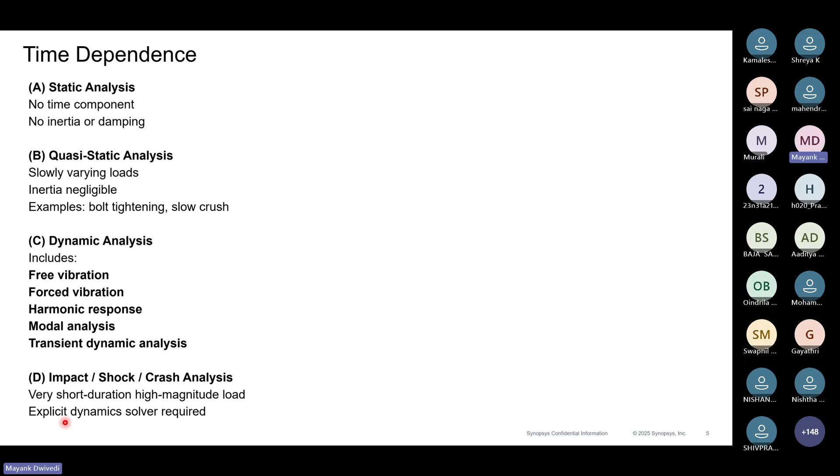This is quite detailed, understanding why those impact loads are solved from explicit analysis. I can give you certain references which you can go through as homework to get that understanding. You can connect with me after this also if you have any query in terms of the references and understanding.

Then moving on to rate of loading - we have static loads which are very slow, so the rate is very slow.

Can we solve with implicit? You have quasi-static, which is not very slow, but it is slow - we assume that the inertial effects are very negligible here. So this also can be solved in implicit.

Then you have dynamic loads, where you have moderate rate of loading, so it can be solved with implicit as well as explicit.

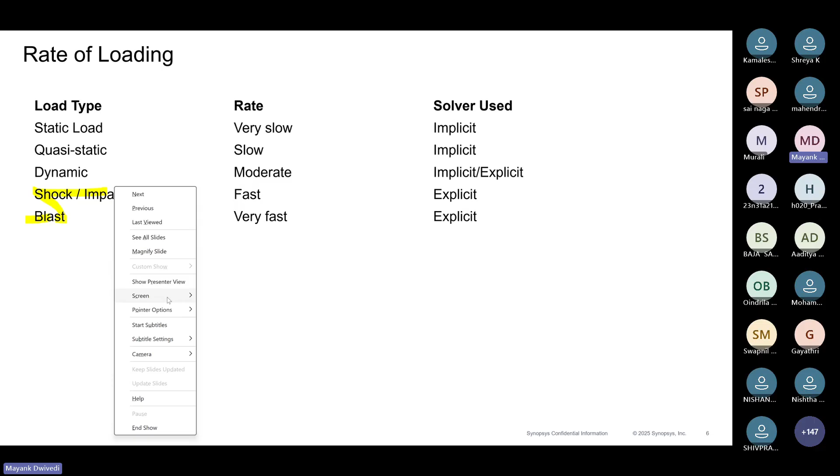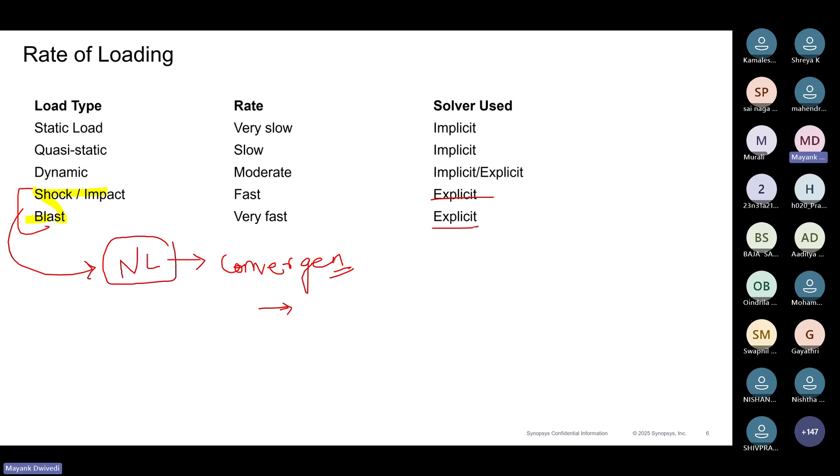Then comes shock and impact, where the rate is fast and you have to solve it with explicit, because these are highly nonlinear kind of problems. When nonlinearity is there in the system, you will face convergence challenges if you solve it with implicit. So convergence is the challenge here, and we solve those things with explicit. There are even other advantages with explicit, but those would be quite in depth, so in the interest of time I have not included those concepts here. You can note it down and go through it as homework.

Now comes classification based on structural behavior. When I say linear analysis or nonlinear analysis, you have an assumption when you derive those strength of material equations, like your deformations would be very small. Hooke's law also states that your response would be linear within elastic limits. So when you have linear analysis, the behavior of your material would be like this red line, which is kind of ideal, because once it reaches your yield modulus or yield limit, it goes into the plastic zone where slipping happens and the behavior is no longer linear.

So if your yield limit is given as, say, 350 or 450 megapascal, and in your structure you are getting a von Mises stress reaching somewhere around 600 or 500, that means your material is going into the plastic zone.

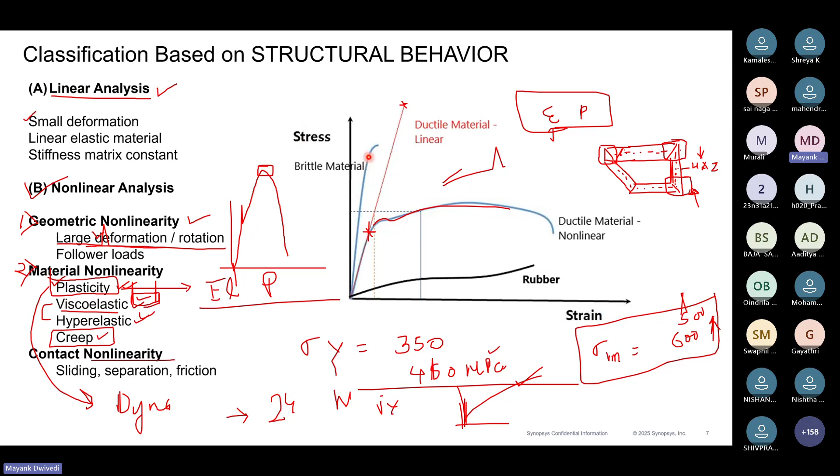So this is all about structural behavior. Other parts are not very relevant, so I've jumped into just explain the concept of dynamic loading. Let's say when we have a dynamic loaded part, my loading is basically changing. That means either my magnitude of the load can vary or the time of the load can vary.

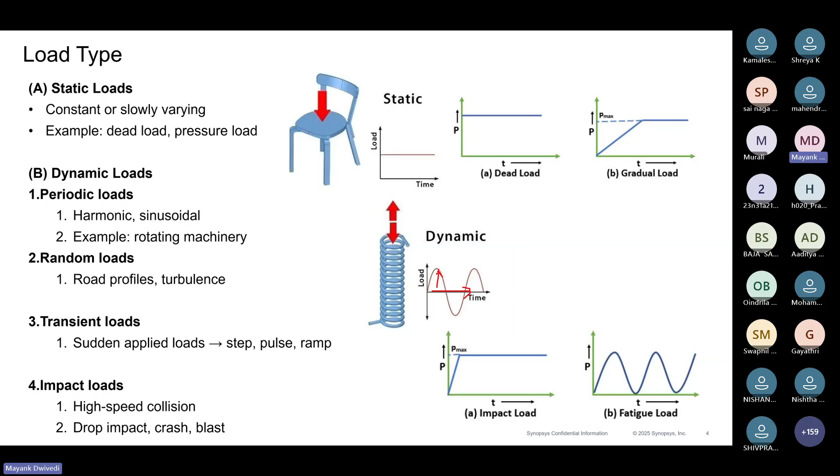Based on that, I have two concepts: one is sigma mean and sigma v, which is the variable stress, or this is your mean stress. So you have sigma max and sigma min. Sigma max is somewhere, let's say for repeated stress, it will start from zero or somewhere on top, and then you will have sigma max, and then it will come down.

Same way you will have alternate stress, where your sigma mean would be negative. It will start from negative, go into positive zone, and then come back to negative. So it's more of a compression and then tension, and that way multi kind of loading happens. Same way for fluctuating, you have sigma mean, it will start, and then sigma max. So this part would be your sigma v variable, and this is the reverse stress.

So your mean would be zero. When your mean is zero, you will have sigma max and then sigma min, and then your loading would get implemented.

Now why I'm explaining this concept is, let's say you have a sigma mean. Everywhere you see, like when you have a static load, your sigma max and sigma min would be a single value. So when I put that here, sigma mean is sigma plus sigma by 2, you will get only sigma application as a sigma mean.

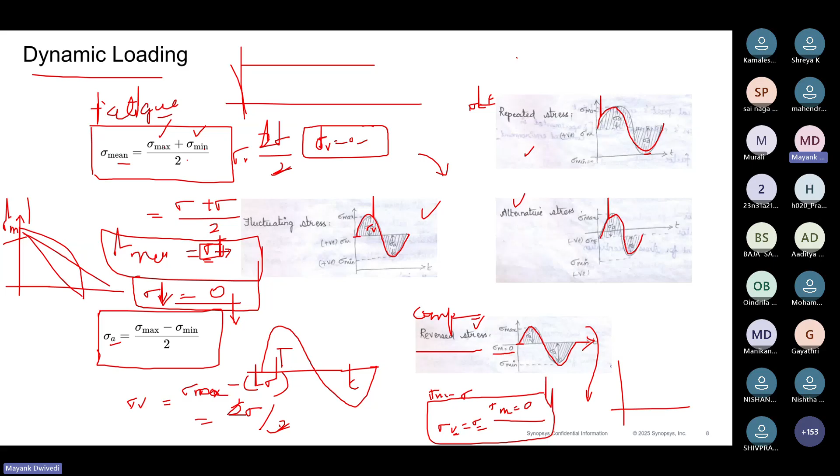So this was briefly about dynamic loading. I understand this is difficult to understand, but think about these concepts - completely reverse loading is the worst scenario, and that's why we cannot apply those sigma equals E epsilon, stress and strain relations directly here, because those equations have not been derived for these fluctuating loadings.

Let me just briefly touch upon what kind of fatigue analysis you can do. You have low cycle fatigue, which is high strain where plastic deformations are high, and these are components where you follow strain life concepts. And you have high cycle fatigue, where at low stresses itself your component usually fails.

One good example is let's say you have a rope and you want to break it. Since a rope has multiple fibers, what you do is put this rope against a sharp corner and do an up and down motion, rubbing it across the corner. You'll see some fibers start failing, and after some time the complete rope can easily be broken.

Because you are loading it cyclically - your loading is cyclic, and it may be completely reverse loading, or you may put more compression or more tension. That way, even before its yield limit, your component will fail. That's the reason you see stress life curves which we follow, the SN curve.

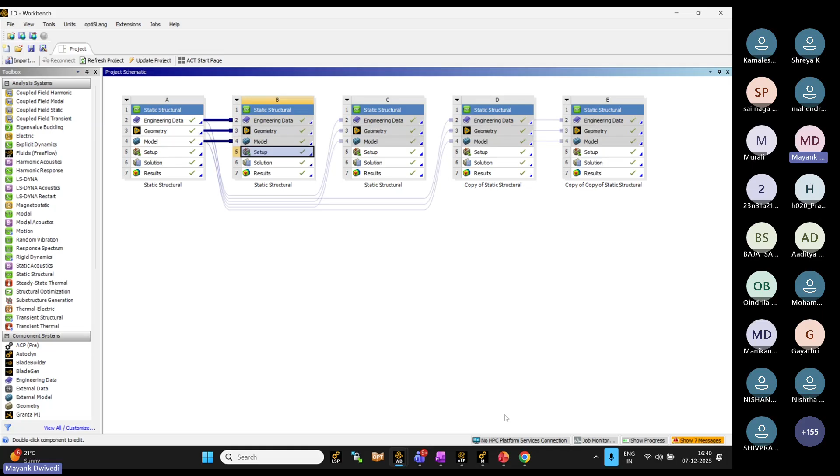There's one point I want to talk about, which most students know because of the tutorials they follow - they create a wireframe and run 1D analysis. I would say 1D is basically oversimplifying your structure. As a CAE engineer, or even as a judge, I would want you to assess the situation. Many of you might have finished your CAE analysis or completed the reports. During the evaluation or presentation phase, I would want you to explain why 1D was not appropriate in your case, or whether you have at least explored 2D, because we talked about this in a webinar.

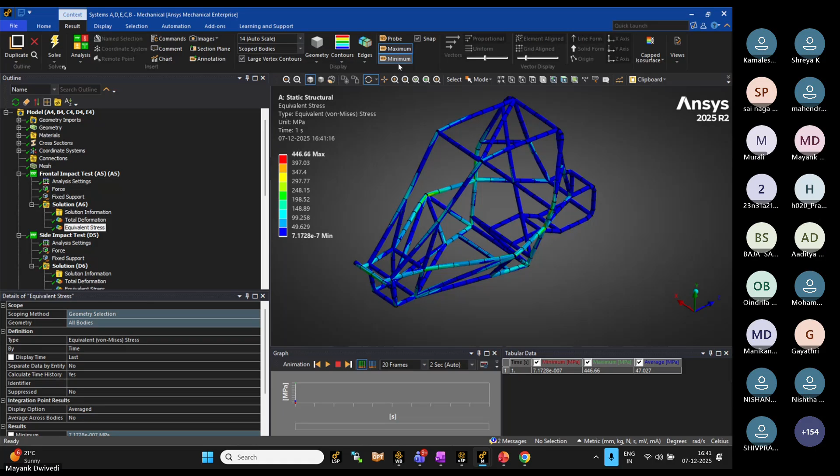Now if you see here, let's say I have a frame and some results are generated. First of all, I want to explain how you can interpret the results. You have maximum coming as 446, and it's coming somewhere here - let me check the results. You can probe the maximum.

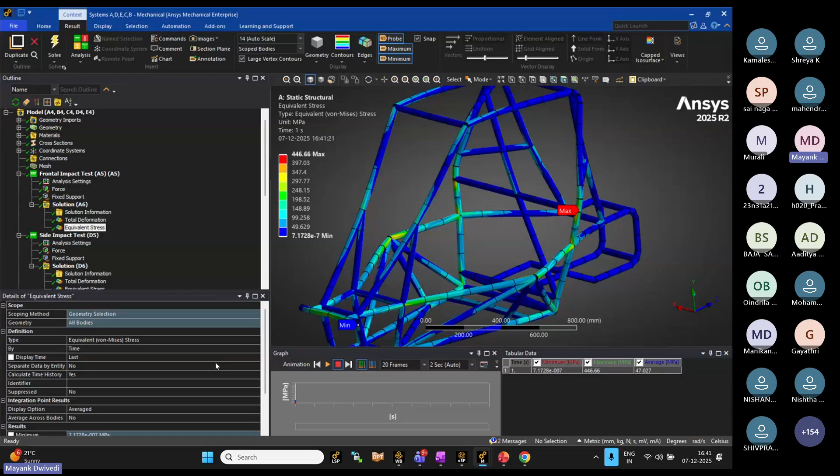So that way you can understand and decide whether these results make sense or not, or if you still have doubts. But anyway, I wouldn't prefer you to perform 1D analysis, because there's one assumption we make - that throughout loading, your cross section would not change when deriving those equations. So in 1D analysis, even with a single bar, it will only have one point where you are applying the loading, because it's one directional.

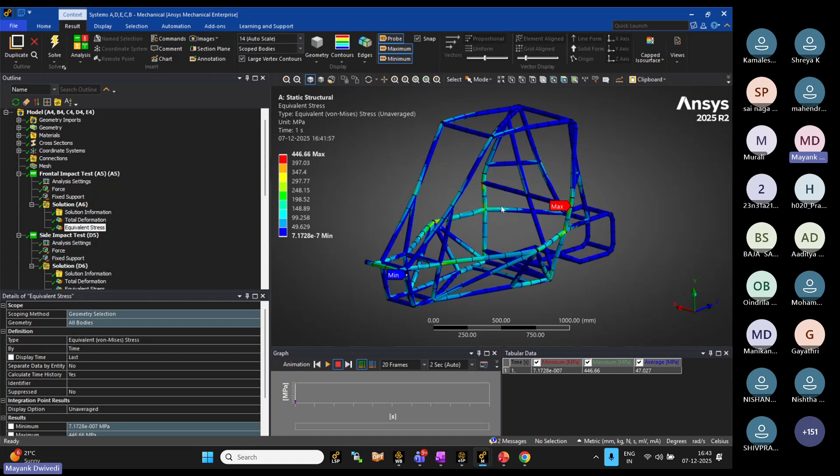Based on that, planar effects or whatever happens in other directions will not be captured properly. So when you put a beam or 1D element through bending, it will not capture that bending properly - because when you bend your frame parts, if you observe physically, your component or frame will first become oval, your shape will change, and when your shape changes, your stress plane of application is also changing. But in 1D you won't be able to predict those impacts, or capture that ovalization of the shape, Poisson's effects, right? So you will not be able to include that in your analysis - that's the reason 1D would not be accurate, or would be oversimplifying your structures.

So what I have done is also create a frame using 2D shell elements. This shell element has 3 to 5 integration points across the thickness.

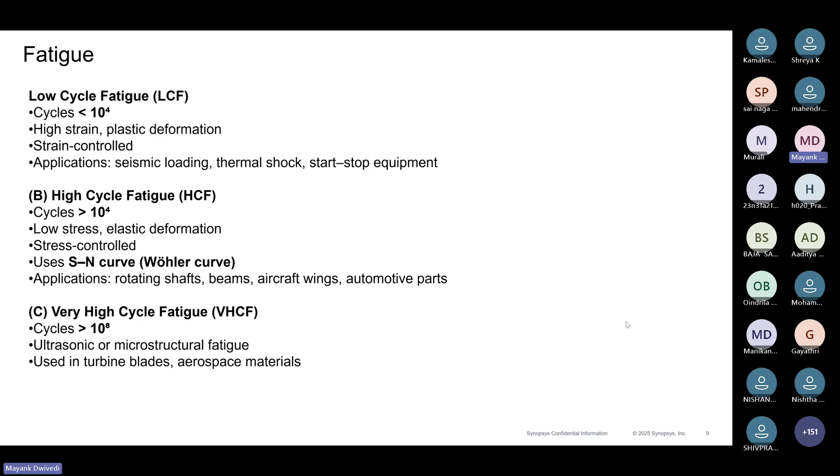When I say across the thickness - let me quickly use this to explain the concept. Let's say here you have a frame, and this is the thickness part, with your mid surface somewhere here. When your part undergoes bending, say loading is applied in this direction and the other way - your top fiber will always be in tension mode and the bottom fiber in compression mode. But with one point integration, you will not have any stress contours, because you're capturing only at the neutral axis. Whereas if you have 3 points across the thickness, you will capture the variation like this.

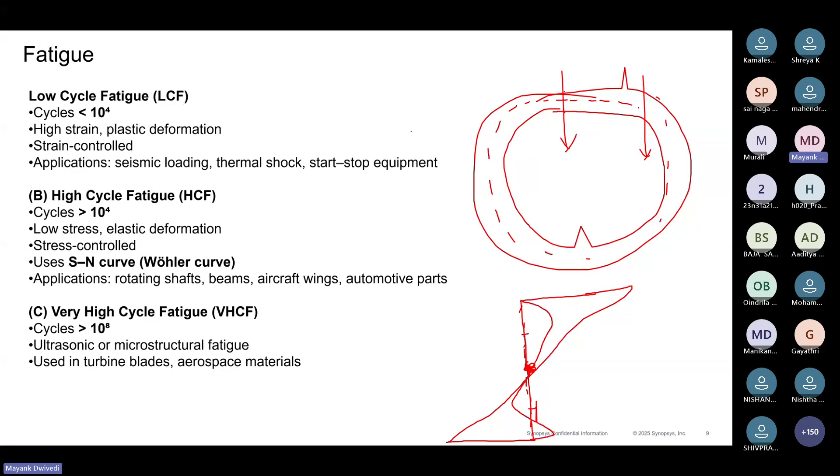So 3 points across the thickness means 1, 2, and 3. I would recommend having 5 points if you have more combined loading, so that way you can capture this kind of stress properly in your frame. That's the reason we advise using multiple integration points across the shell element thickness, and you can get this option in your dynamic analysis.

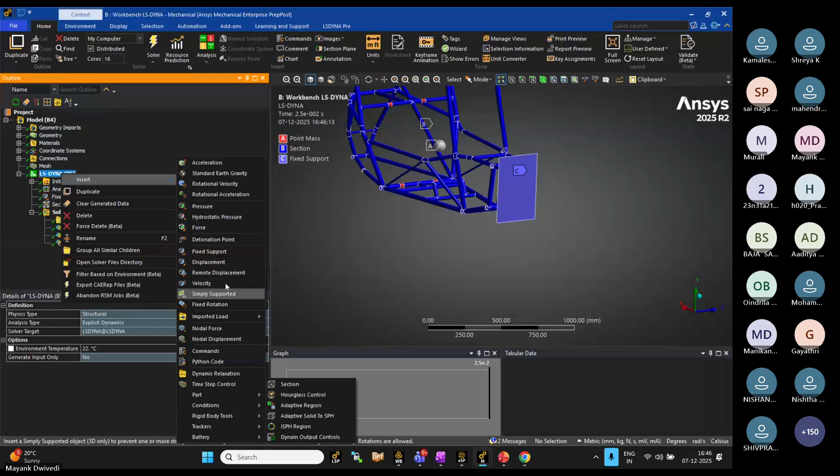If you go here, maybe not here, where is it? LS Dyna, yeah. So if you see in LS Dyna, you will have this option of including the section. When you right click on it, you will insert the section. So when you insert the section, you will be able to do it from LS Dyna pre.

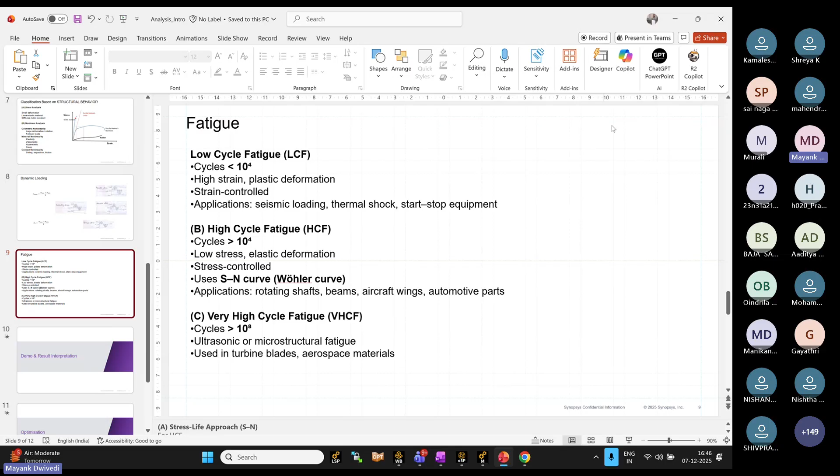Where is it? Section properties. So when you edit, you'll be able to define the integration points across thickness. When you include it, these are practices which, as a CAE engineer, you need to follow. Otherwise there is no difference between an engineer and a layman person who just follows the tool. That way you can define it. These are small things which, understanding them, will make us a little bit better day by day. So that's how you can define the integration points across the thickness so that you can capture the bending.

So I would recommend doing all kinds of analysis on the 2D model. For mesh size, the recommendation is to capture the stress wave progressing across the structure, so that way you can define it. But mesh size should remain such that you do a mesh convergence study, and wherever your stresses are stabilizing, that way you can follow.

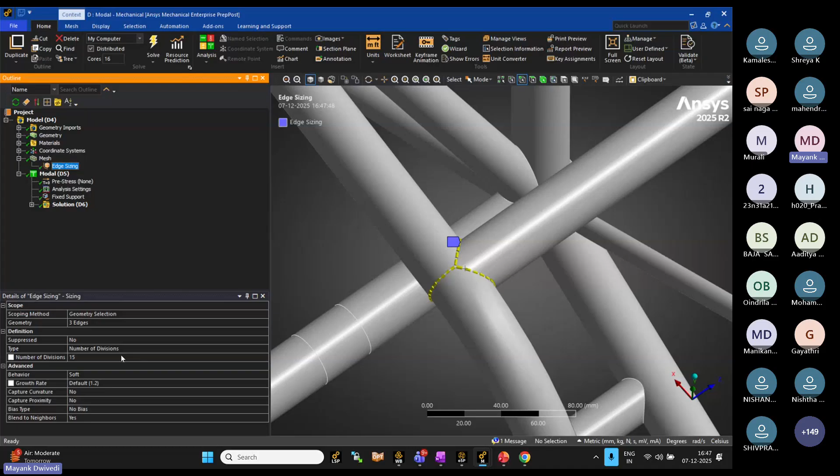Try to model, if in case you have a single frame, try to model the intersections using the way I have used edge sizing. You can define the edge sizing - you can select the edge, pick the edge, and right click on it. You can insert sizing, define the number of divisions, and with that you will get more uniform mesh across your connections also. So these kinds of small things you can follow to have more structured mesh.

And I would say to go ahead with quad mesh, because this would not be very stiff in terms of your deformation predictions. So mesh-wise, you can use quad mesh.

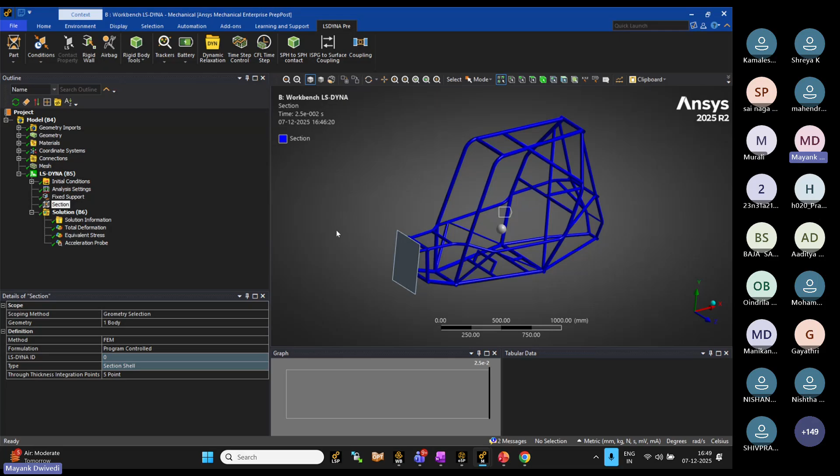You can do the mesh convergence study, and you should be able to talk about it - like if you have picked 10mm versus 4mm, maybe in your model you may not generate much difference. That means your model is already optimized in terms of mesh count. So you should be able to answer that you have done this analysis, and this is the best possible settings as per your computation resources and as per your time. That way you can explain those things.

Now comes the material part. So here I have defined bilinear isotropic hardening, with a tangent modulus of 206 megapascal. So I have yield strength and I have tangent modulus. This bilinear is basically telling - your initial part is linear, this is the elastic response, and this is your plastic response. So this is the bilinear type of plasticity.

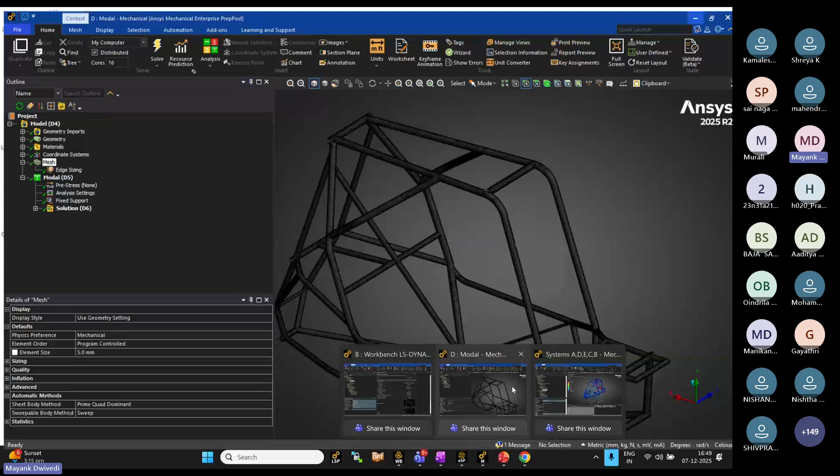So this is the material used here, and that's where I have defined the elastic plastic material - I have used three materials here. Now comes the optimization part - I have the material, and now how to select this material and how to select the thickness.

One way is you can define multiple analyses performed - like you can create one more model with a varying parameter, maybe thickness, and with another analysis define your material separately. Or you can do it in the analysis itself, in mechanical itself. Let's say this is the surface - I have put it as a P, earlier this would be like this. So what I have done is I have defined the thickness and put it as a parameter.

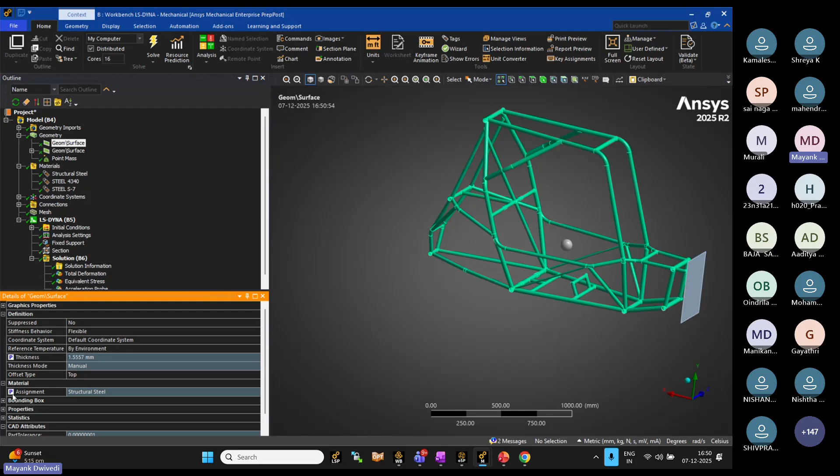And same way I have defined material as a parameter. So when you activate these two points here, you will get this kind of window in your main window. That's how you have defined your parameters. If you see these parameters, they will come this way. You will have P2 and P4 - P2 is your material assignment and P4 would be your thickness assignment. Now it will talk about what would be your output parameters.

So then again, you have to define your output parameters. Now my output can be my equivalent stresses, either maximum, minimum, or averaged. Or maybe what I can do is optimize for my deformations, or optimize for my mass. That mass may not come here, but yes, you will have another option of minimizing your mass.

So you have defined these parameters - maybe equivalent stress, you have put this as a parameter, and maximum value of this as a parameter. So what you will get is you will be able to see, okay, this is the stress maximum, which is also your output parameter now. So these would be your inputs, and with this you will have your output as a parameter - it also gets impacted.

So then what I have done now - when you click on this, you will get this window which is the table of design points. So if I close this, I will get this kind of window generated. Then you can define, okay, this is my assignment for material, and this is my assignment for thickness. So I can vary my thickness also, I can vary my material also, and these are my design points.

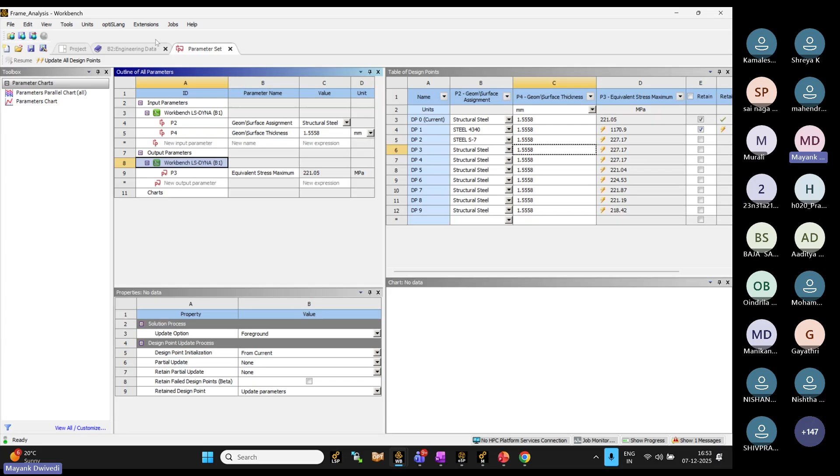So the important thing is you have to define those materials in the engineering data, and you should be defining those with actual values or the parameters which you have at your disposal. So this is one way of doing the optimization, which can be done with a parametric approach even in the mechanical itself. Another way is there is one tool called optiSLang.

So optiSLang is also lying here. You just have to drag optimization and put it here this way. When it's dragged here, you will see this kind of window, and when this window comes, you will be asked for two to three options. Let me see whether again it will ask for it.

Now it will ask for the criteria. So what would be my criteria? My criteria would be to minimize the maximum stress - this is just an example. So what I have done is I picked this as a response, and I am putting this criteria as minimized. Either I can maximize it or minimize it, and for mass also we can minimize it.

So when you define this minimization, it will ask for how many number of iterations you want to run. Just for the demonstration purpose, I have only put 5 runs, because it was taking quite a lot of time to run. So that way I have defined 5 iterations.

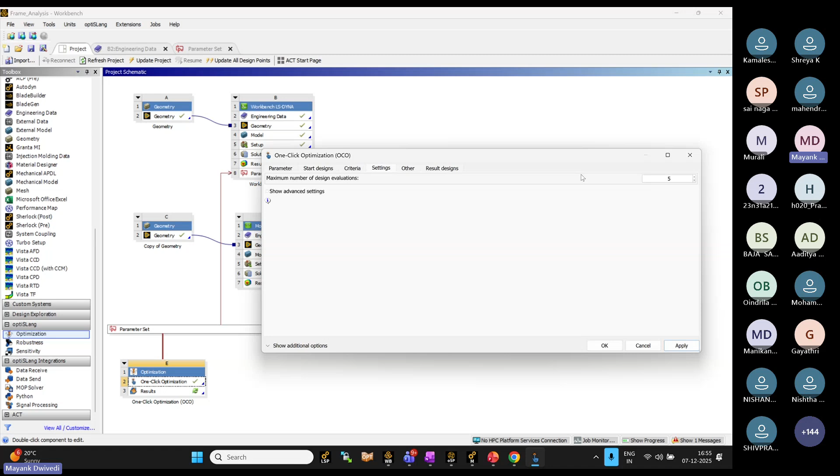And once you define all those iterations - if you see here, maximum number of design evaluations, you have put 5. So it will run 5 iterations, and based on that, it will try to minimize the mass, minimize the stresses. If you see here, with the value of thickness, it has reduced - it has kind of minimized your stresses. So in the 5 iterations, you have got 218.424 as your final minimized objective. That's how you can define the optimization, and do the optimization on your components accordingly.

And I mean, once you start following the optimization, you would be able to understand - okay, this much of mass is being saved, or that is how robust my design would be.

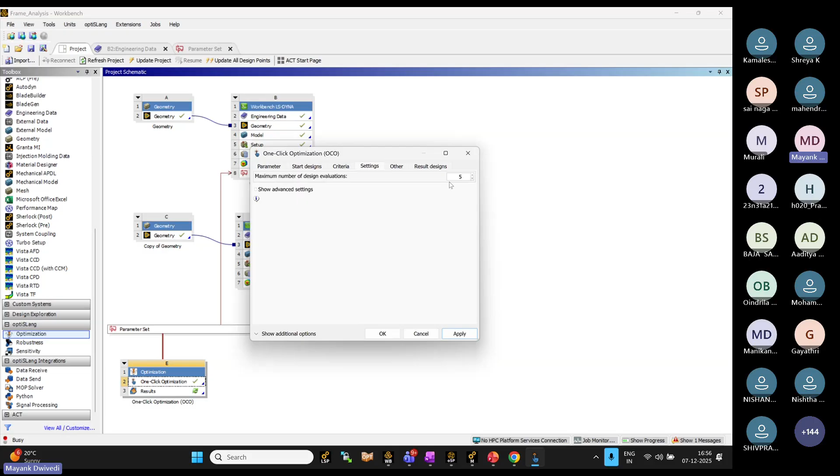So I think I have briefly touched upon optimization. There is no theory part to explain in optimization, because it's about parametric variation and based on that, what should be your response. You can do this manually by running multiple analysis instances, or you can do it in a streamlined way where all outputs get compared together, and the results make more sense.

Now, why optimization? We have two kinds of optimizations. It can be direct optimization, which we have done, where we are simply running iterations, varying the thickness or assignment, or we can have one more thing called meta model.

From a machine learning or algorithms approach, we can create certain surrogate models which would further reduce the design iterations needed. This is a more in-depth topic which may not be very useful to you as of now, but you can give it a read and maybe utilize it in your optimization purpose.

So this was all what I planned to cover today. I hope some of the value addition has been done today. If you want to understand more in depth about FEM analysis, there is a very good book called Finite to Infinite by Nitin Gokhale, where the language is very easy. You can follow it in your day-to-day life, and it would make a difference in your understanding.

If you want to understand finite element method in more depth, there are NPTEL lecture series from IITM that you can follow. And a very good book from K.J. Bathe is also there, which can be followed. I think that is all from my side today.

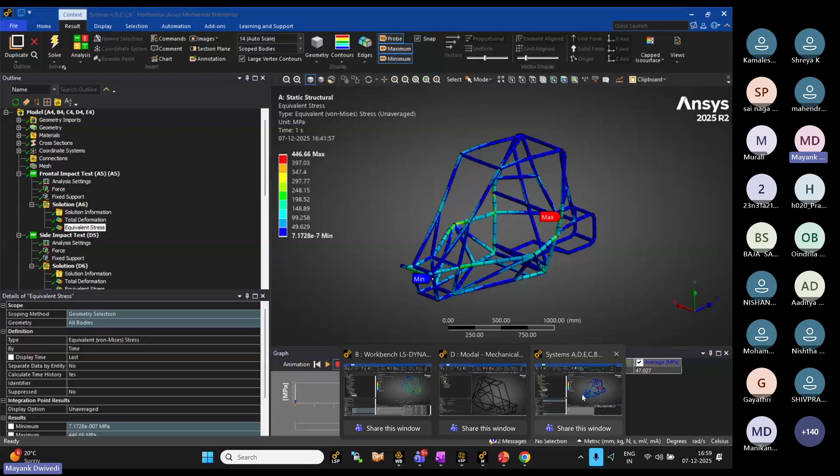Let me quickly showcase and explain this with an example, maybe in my model. So, in this itself, if you see here, this is a dynamic analysis where FOS will not make any meaning. But you see here, when this model is being buckled, the complete member is being buckled, right?

So when this member is buckled, that definitely adds to your FOS being very small. So what you can do is try to see whether some local bucklings are happening in your model. Maybe somewhere we have small interfaces.

Let's say in this model, maybe in this area, the top triangulation is quite rigid, that's why it is not deforming. But sometimes you see deformations in this area itself, and that also would lead to lesser FOS.

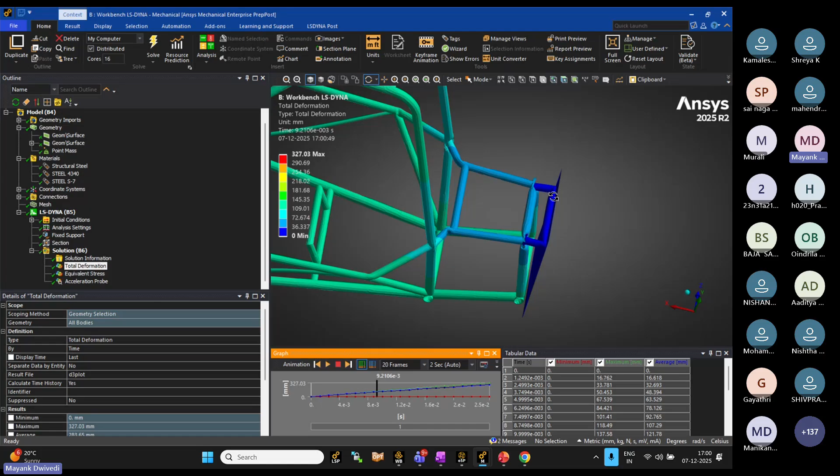So first of all, you need to understand whether the deformation is localized or not. If it is localized, you can further triangulize it and make it more distribution-worthy. Your structure should be such that it can distribute all the loads coming to other locations, or absorb it appropriately.

Can we use surface model here? Surface model is basically the 2D body. Yes, you can use surface body. Preferred mesh quality would be, your mesh should capture the flow properly, your deviation should not be there. You have multiple quality criteria in terms of mesh - those are pretty standard values which you can get from the internet, but try to see that your out-of-plane deformations or out-of-plane mesh quality should not hamper.

For mass optimization, I think I would give some references. From there you can try to understand it, because in the interest of time it is quite difficult to explain it in detail.

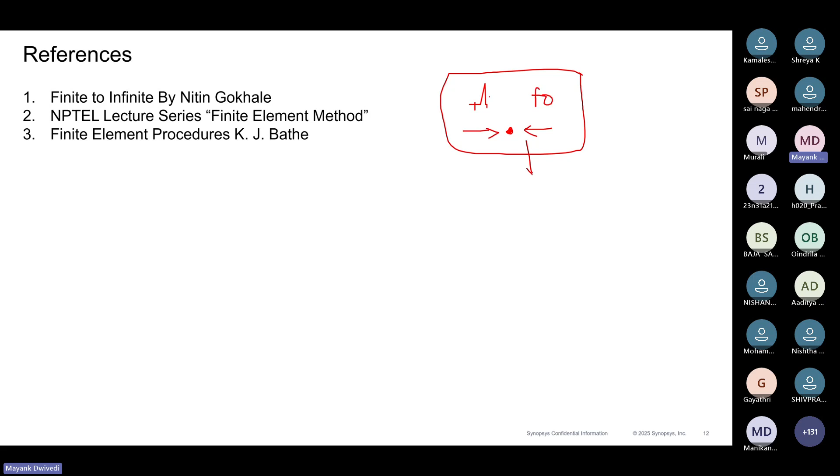So in dynamic analysis, what are the results which are important? I will quickly showcase it here. Generally, in implicit analysis, there is a simple difference between implicit and explicit analysis. Implicit analysis, for each and every time step, balances your input and output force - force input equals force output. That is called convergence. Whenever your convergence is happening, your analysis will be accurate.

Whereas in explicit analysis, what happens is it basically checks for energy, because here there is no convergence check at every moment. For each node, your forces will get converged, your moments also will get converged - it will be equated to zero. So all the forces would get balanced and all the moments would get balanced. When this balancing is there, you will not get any errors accumulated in the results.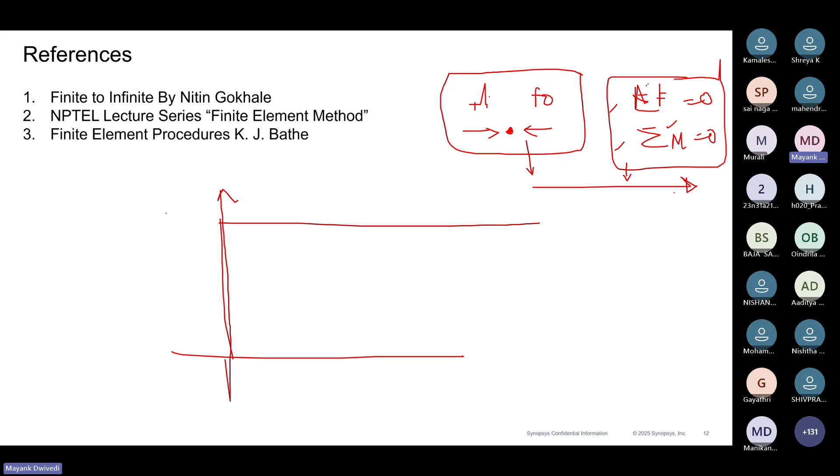But if you talk about explicit, this balancing would not be there. So what it does - you will have total energy of the system, kinetic energy. The energy given into the system should be absolutely converted into internal energy of the system. There can be a small gap because of contact parts coming into the picture. So whenever you do explicit analysis, always try to see whether your convergence of KE to IE is appropriate, or whether any contact energy is rising. First check should be the energy conversion. When the energy conversion is accurate, or the phenomena is captured properly, then you check the animation. If your phenomena is captured, you can read those deformation and stress results. I think those would make sense.

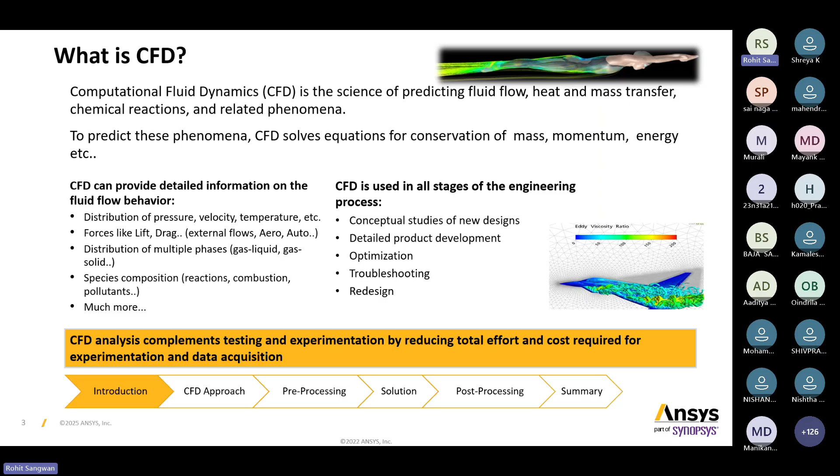So overall, CFD will save your cost and time also. So you can check in your simulation, then go for the manufacturing part. First check your design, then go for the manufacturing.

So you can see in this car - generally in Baja we don't have very high speed vehicles, but if we talk about the FSAE car, drag plays a very important role there. But here also we can reduce the drag, so we can have maximum efficiency. So overall it will save our time if we go with the virtual simulation.

These are few examples - other kinds of simulation also we can perform, like turbo machinery, compressor, IC engine combustion, two phase heat and mass transfer, then heat exchanger.

So you have a radiator in your vehicles. If you're fixing that, then how heat is transferring to make the engine cool - that also is very critical. So you can do those kinds of CFD simulation also there.

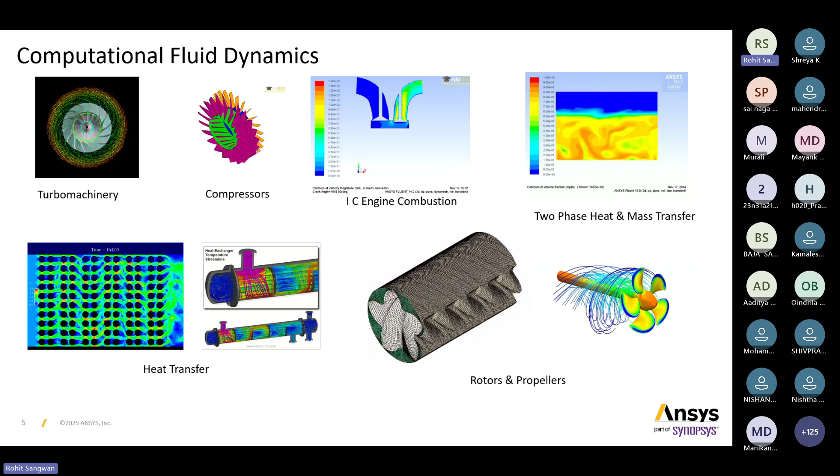If something is a rotating part and you want to do CFD simulation there, you can perform the analysis of that part. Generally, we can do tire simulation also, but at student level we are not performing that much. But if you have something rotating that you want to analyze, where the flow plays a very important role - either air, water, or any fluid medium - then we can perform the CFD simulation there.

So these are a few example applications where we can perform CFD simulation, like internal flow, whether the flow is laminar, turbulent or multi-phase. We can perform internal flow simulation, external flow simulation, battery simulation, combustion simulation also if you want to optimize your engine. For that also we can do CFD simulation using Ansys Fluent, as well as another tool, Ansys Forte, where we focus more on the combustion part.

So most industries are using simulation to optimize their engine power. Then heat transfer - so you are putting a shade on the driver, how much radiation it can bear, because when you're driving in rest conditions, okay, there is a lot of heat that will come. So what kind of metal we can apply, how much conduction and convection will come - all those parameters you can identify with the help of CFD simulation, and you can make your vehicle in a better way.

So the shade material, along with the design input requirement, how you can make heat transfer more effectively - how much sun radiation will come, how much temperature will be there at a particular location when we are putting brakes. So we do structural analysis along with it - if I'm putting some coolant, hydraulic cooling, how it will help me. We'll increase some weight, but the efficiency of the vehicle will also increase. So this kind of simulation we can perform on our vehicle.

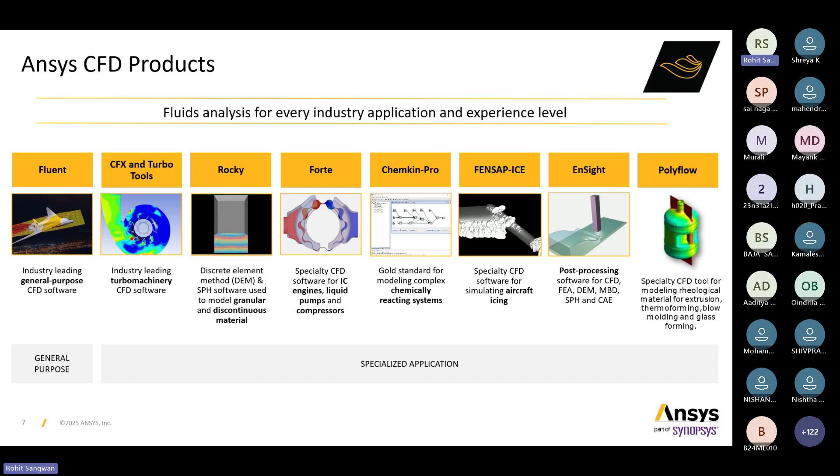Then lastly we have Polyflow. We find a lot of plastic parts in vehicles, related to plastic molds - how the mold will be created and how the formation will take place. Those kinds of simulations we can perform with Ansys Polyflow.

Now we'll go through the CFD flow chart - how we do the simulation and what the procedure is. First we have to identify our problem - what kind of simulation I have to perform. If I'm looking at external aerodynamics, I have to identify my major goal, whether to reduce drag or reduce lift. We can work on both together, or focus on them separately.

If you're looking at heat transfer, based on those parameters we have to identify our domain, and we can clean up our CAD model also. We'll identify the domain, then do the pre-processing. We can create our CAD model, or we can create it in our SpaceClaim tool. There are three tools for modeling purpose: Design Modeler, SpaceClaim, and Discovery.

Nowadays we are using Discovery because it gives faster optimization - without providing meshing and those other parameters, I can easily visualize how the flow will happen. That is generally used in the design phase.

If you have other tools like SolidWorks, you can bring that CAD model into SpaceClaim and repair that CAD model. Mostly what students prefer is to download from GrabCAD, then do the simulation on that part by changing and putting their own parameters, and see what kind of results they get.

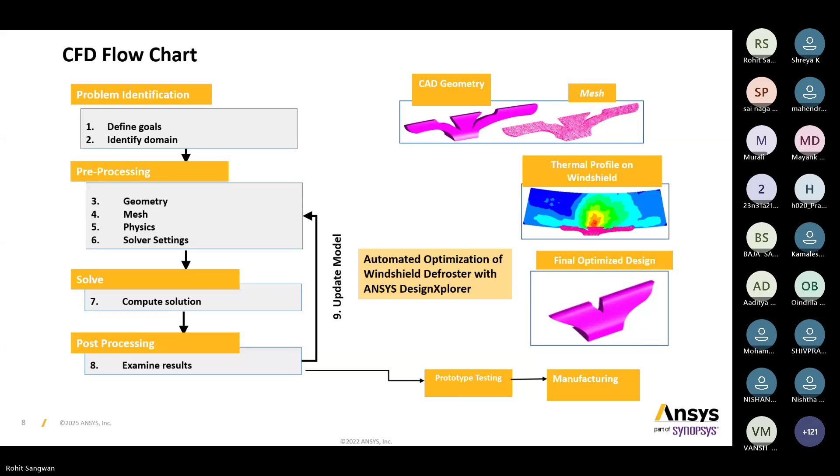If we see tool-wise, modeling we'll do in SpaceClaim, then convert our CAD model into a mathematical model, which we generally call meshing. For meshing we have 4 tools: workbench meshing, fluent meshing, TurboGrid, and ICEM CFD. Generally students prefer workbench meshing. Fluent meshing is more advanced. If you're working on a turbo machinery part, you can use TurboGrid. And if you're looking for structured mesh, where we have a lot of complex design and ample time, we can go with ICEM CFD. Mostly research scholars use ICEM CFD.

You can use both workbench meshing and fluent meshing, but fluent meshing has a major advantage - we can generate good mesh quality with less mesh count. When we have less mesh count, we have to run it for less time, so the computation time will be less.

Then we'll set up our conditions in the solver based on the problem statement, and then check the results. We have the option to check results in the tool itself, as well as other post-processing tools inside CFD Post, and then we can optimize our design also. So we can do the post-processing part also.

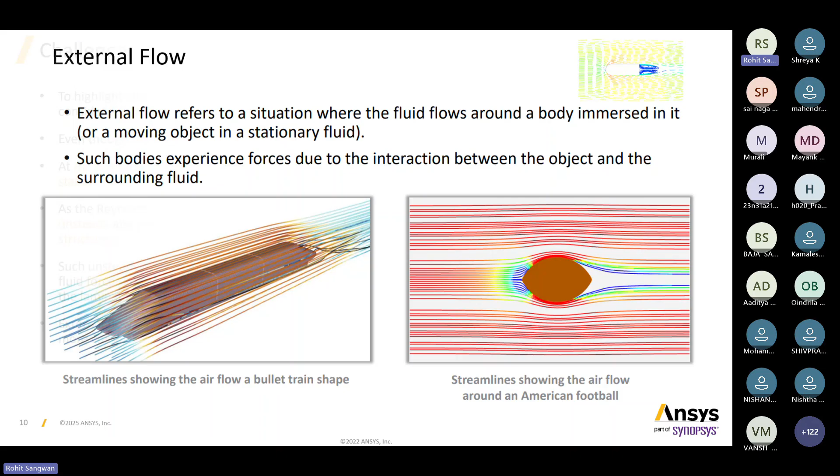So they might look very simple. For external flow simulation, you can take one example: we have a simple ball, a circular ball.

Now we'll go with our modeling part. So you can have a model of your design. Generally, when we have a car model, we create an enclosure outside the domain, so that the complete body could be immersed inside the fluid domain.

Also, when we're creating the enclosure, the tire will have sudden contact with the bottom surface, the ground level. So there might be chances that if we have sharp edges, they will be contacting with the ground surface, and the mesh quality can be reduced.

So generally, what approach should you use whenever doing simulation? Always try to give some fillet near the tires. That will help us reduce poor quality, get better mesh quality, and skewness will also be near zero.

We have also observed that a lot of students simply create the enclosure and run the simulation. That will give some values like lift, drag, and coefficient, but it will not be that accurate. So if you want to optimize and see how the flow is actually separating, where the boundary layer is forming, for such a scenario we have to create a body of influence.

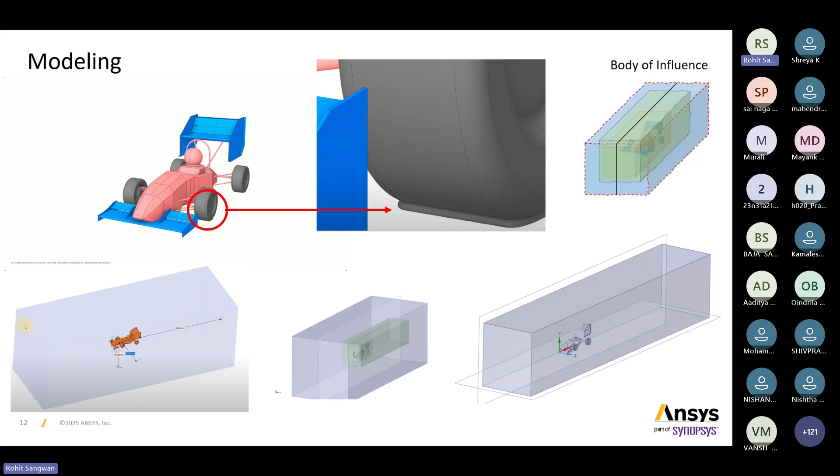Since we know our domain is very big, to reduce computational time we made it half, made it symmetric, because the geometry is symmetric. Whenever your geometry is symmetric, we can reduce computational time by cutting it from the center plane and using the center part. So we have finally used this design as our part.

Since the vehicle is moving, the wheels will rotate. To give the rotation coordinates, we have to find them in the tool itself. From SpaceClaim itself, we can find out the center of axis location. We can create the center of axis in the vehicle tires, and measure it from where it was when we imported the models, because the origin point could be different for the tire and for the complete design. So we find the center location to give the rotational velocity in the setup later on.

Then we have to provide the naming. For our case, this is my inlet, the right-hand side is my outlet, this is my tunnel walls, and the downside is my ground plane. In our case the ground plane is moving and the wheels are moving. We have given names to all parts, because naming is very important—based on the naming only can we provide boundary conditions.

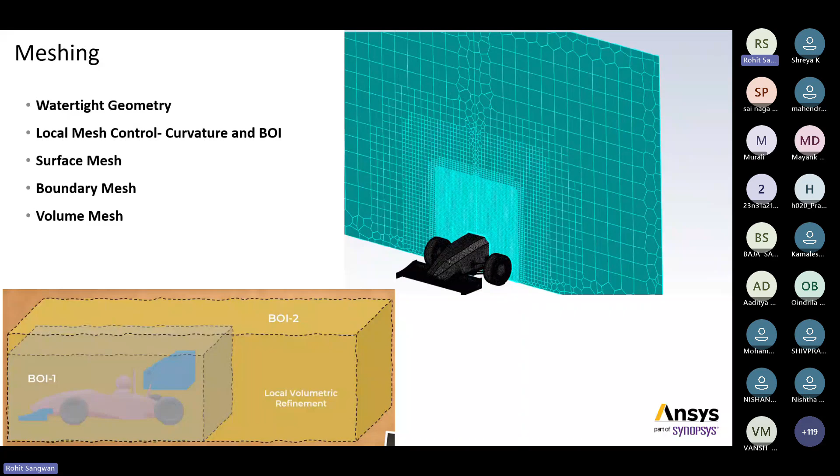Once we complete our modeling part, we'll go for the meshing. If we go with the workbench meshing, we can go with 2D and 3D. Till version 25 there was only a 3D modeling meshing option, but in 25 R2 we can go for 2D meshing also in Fluent meshing itself. That's why most students were preferring workbench meshing, but now in Fluent meshing, if you have a 2D model you want to optimize, you can do that too. So we have two options.

As you can see, we have a clean CAD model now. But suppose you have some dirty CAD model, in that case we can use the Fluent fault-tolerant meshing, so we don't have to repair that much without wasting time. We can go with the meshing and use the fault-tolerant meshing.

But for this case, we are using watertight meshing and we are providing some local mesh control, at the body of influence 1 and body of influence 2. Also, since we have a lot of curvature surfaces in our domain, we are creating curvature control also in the meshing. I will show you in the tool how these inputs are given.

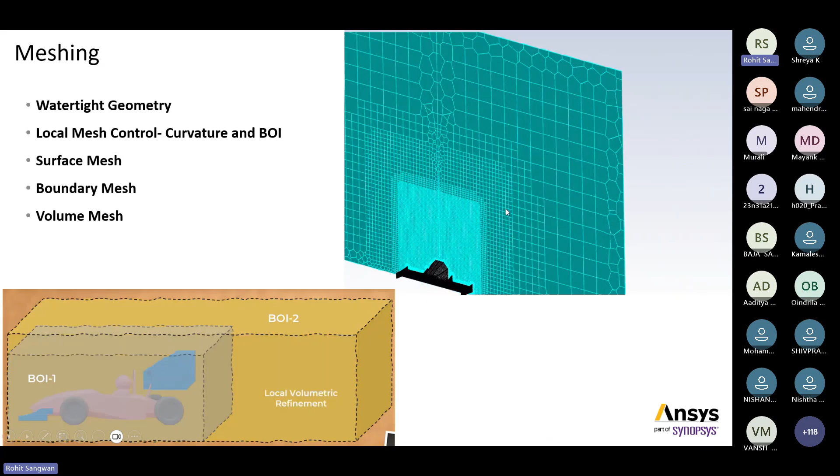Then we'll generate the surface mesh, and then the boundary mesh. You can see near this region the mesh is very fine and gradually increasing, so it's not that suddenly it goes from very fine to big size. This is something you have to keep in mind when doing meshing. Wherever we have objects, that region should have fine mesh, and in the enclosure you can do some coarse mesh also. Then finally we'll generate the volume mesh.

So this is the meshing settings we have taken. We can import the model. If you have the model in mm size, you should select mm units. If you created your model in meters, you should select meter as the unit when importing the model.

Then we'll apply local sizing. Generally students prefer not to apply local sizing, that's what we have observed. They will just click on mesh, go with the naming, and directly go to the setup. So always go with local sizing - that's why to do very fine meshing locally, we created two boundaries. You can see near this region I have created very fine mesh compared to the outside region. Then we'll describe our geometry.

There is a standard flow chart in Fluent meshing that you have to follow step by step. Once we apply the local sizing method, we'll describe our geometry, update our regions to see what kind of regions we have, and then we will add the boundary layer.

So boundary layer is the inflation layer - whatever inflation layer we create in workbench meshing, here it's called boundary layer. The boundary layer is very important to capture our flow near the walls. The y plus value is very important that we can optimize, and based on the velocity parameter values, you can find out the y plus value also.

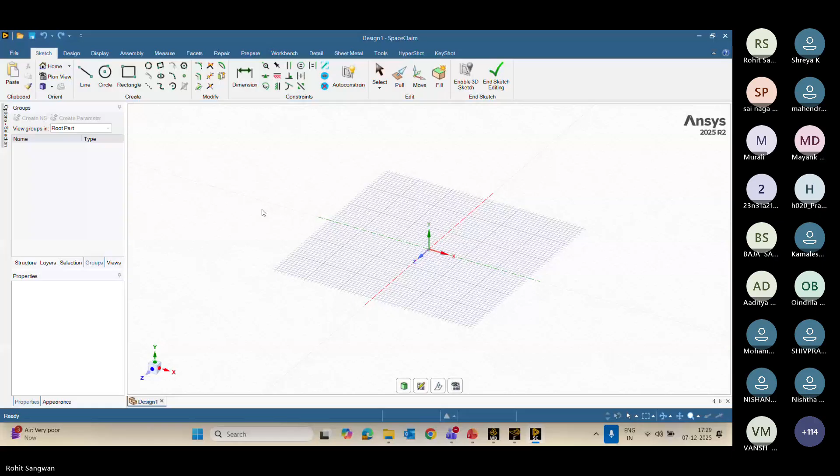So I'll show you the structure. This is like a half model, reduced. So we have the parts which are not activated. Generally whenever we are doing external flow simulation, we deactivate the models, so I have suppressed them for the physics.

Either you can uncheck them or deactivate them, because when we create the enclosure, it will imprint the faces of our CAD model onto the enclosure. So the solver will assume there is an object here, a vehicle, and it will calculate on those walls. That's why we have closed and unchecked this part.

So there we have front wing, wheels, chassis, rear wing, and now we have the enclosure - that is our fluid domain, and we have given names in the groups. So naming is very important.

Whenever we are doing Fluent meshing, the naming should be done in SpaceClaim itself. Later you will not have the option to do it in Fluent meshing. If you're doing workbench meshing, then you can do the naming in workbench meshing itself.

So this is the inlet we have, then we have the outlet on the opposite side. These are my tunnel walls, then we have symmetry on this side, meaning the same thing is there on that side. Generally that will reduce the computational time.

But if you want to use it for post processing, we can visualize the complete vehicle also, so I'll show you that. Then we have the ground that will be moving. So this is the body of influence, far field, wheel radius, all those things - we've given names so we can find out the forces on all these parts.

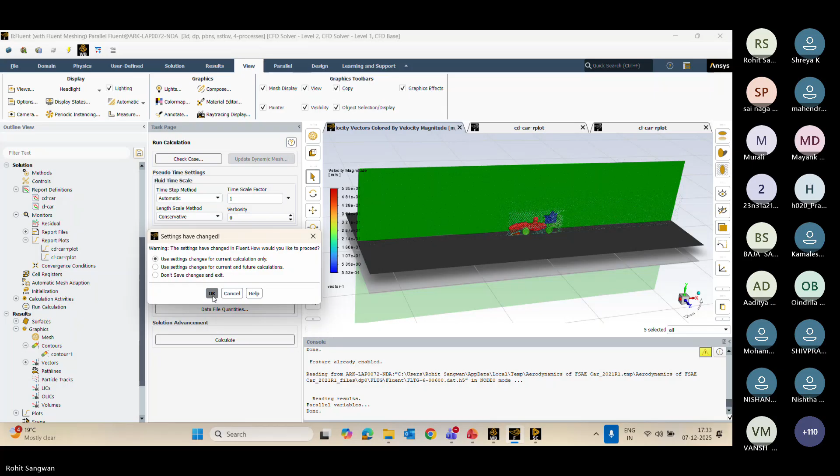Edit. So we can edit the Fluent meshing also. If we have done some meshing part, we can edit that part also.

So it will take some time, we just have to wait. So this is our domain.

There is an option just like we create the section plane - here also we have the option to insert clipping planes, and you can select the location in which you want to visualize the part.

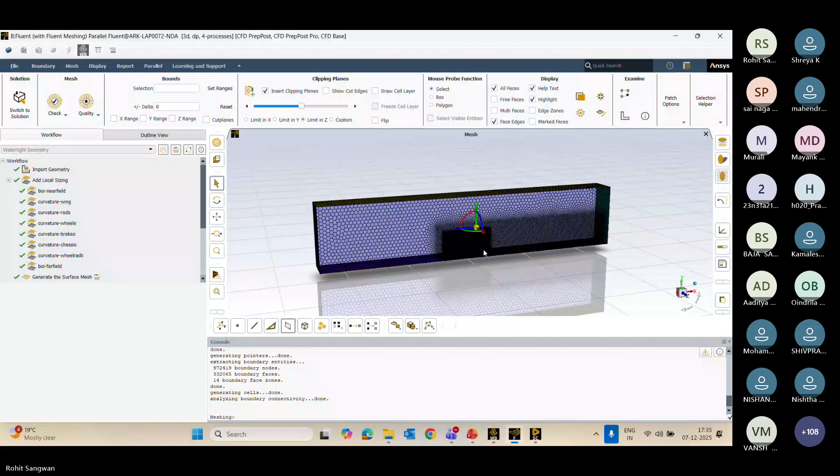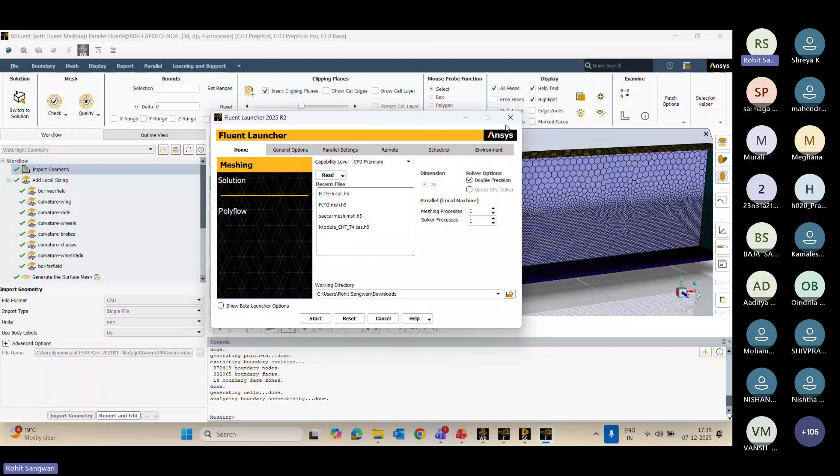So we have the option to first import the model geometry. If you want to work in the standalone system, there's also Fluent, where you can directly select whether you want to work from the case and setup with the solution, or work on the meshing part. You can select the directory where you have the file, or you can go with the workbench. So we have two options.

Generally, when we import geometry, we can select the file here. Since we are coming from the workbench, it will select automatically. Then we have the option for local sizing, whether you want to add it, no or yes. If you select yes, we have the option to apply a body of influence, select its type, and give it a name, as we already have for the part. So like this, we have to create it.

In this case, when we have external flow simulation with an enclosure, we have both domains, fluid as well as structure. But in SpaceClaim we have suppressed the solid domain since we don't require it here. So for this case, we are taking only the fluid region. But when doing battery simulation or other cases where both solid and liquid parts exist, we'll use the option for fluid region and solid region. There might also be cases of internal flow simulation where the fluid region is not there, like a hollow pipe, and I want to extrude the fluid region - for such a scenario we use the solid region. As of now, we are using the second option.

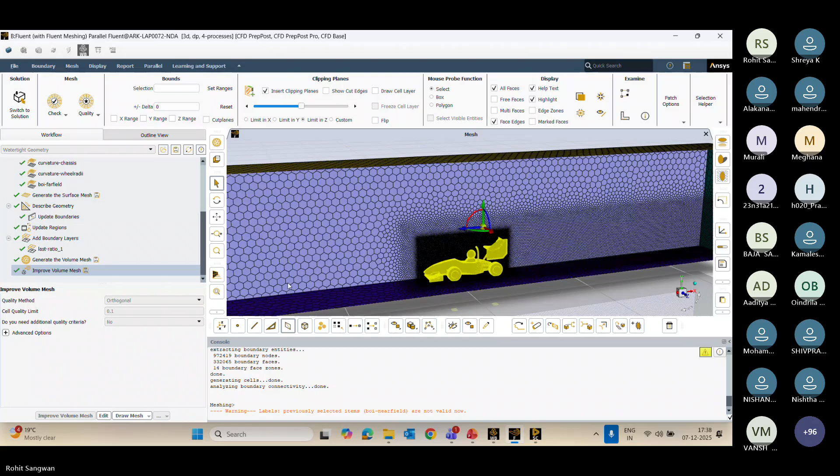Which parts we can delete as they will not affect airflow. So if you want to delete some parts, you can delete them. But in this case, what we have considered is the full whole aspect, outside the enclosure where the major force is. On the backside, you can also delete some engine parts if they are not open, but if they are open and air is directly coming through, there will be cases where the pressure will change, and there can be some recirculation regions also. So it depends on how you want to do the CFD simulation.

Just a second, it is taking time. I will just open the previous one. So directly you can switch to solution and you will come to this tab.

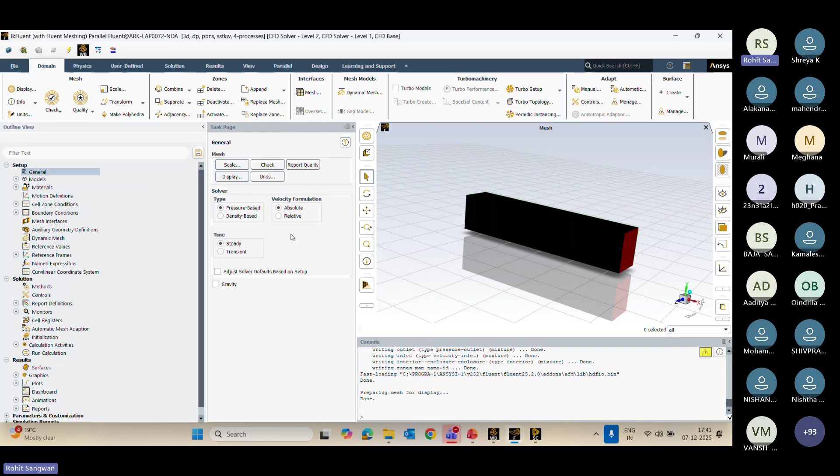Since our flow is not highly dependent on density variation, we are using pressure based solvers. Also, flow is below Mach number 0.3, so we use pressure based solvers.

We have two options: we can find results of fluid properties with respect to time, or just the final results. Generally for an initial case we go with steady state, but when we want to capture a particular time, that is a transient condition, we use transient. When studying flow with respect to time, we go with transient. As of now, we'll go with steady state.

Then in models, our viscous model is very important. Based on our velocity, we have taken input assuming 20 kilometers per hour. With respect to our inlet diameter and fluid properties like air viscosity, I will find out the Reynolds number.

Based on Reynolds number, I check whether the velocity lies in laminar or turbulent flow. For our case, the flow is turbulent. In turbulence, we have different models like K-epsilon, K-omega. When we want to capture flow separation, K-omega is recommended.

And to capture parameters near the curvature, we are enabling the curvature correction parameter also. Then these are the other parameters which control the constants in our equation.

If you want to know more, you can go to the help and read the complete theory of which model is useful for which kind of analysis. Large eddy simulation is generally used by researchers who have ample time to capture how each eddy is forming. As of now, we will not change this.

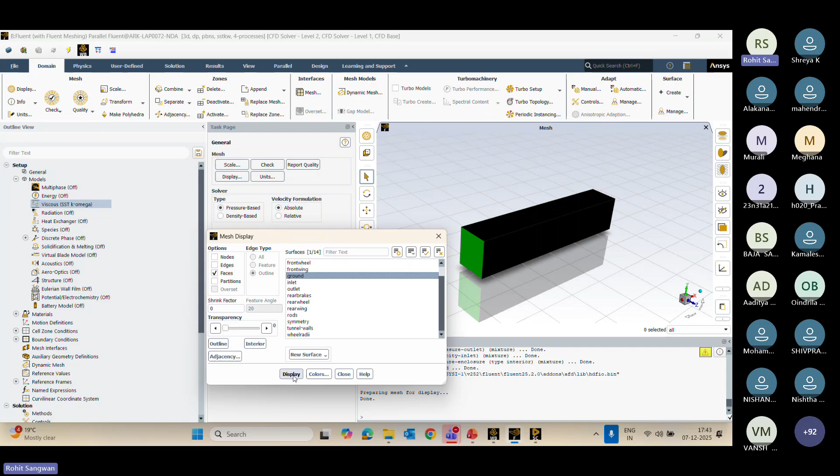Sometimes we have the mesh file. So what we can do is simply go to display and check the mesh also. Let me show you here. Whatever you want to display, it will display, so you can check the mesh file and see what inputs we have brought in.

If I check here, we also have an option: instead of this name, I can go with surface type only. So I want to select only all walls and select display. I have hidden the symmetry, and I'm hiding the tunnel wall.

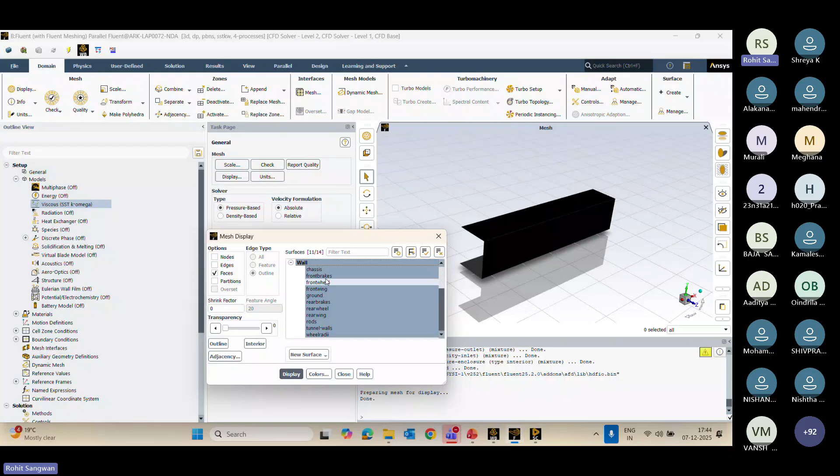Now inlet and outlet, so we'll get better clarity of the view of how the flow is, because when doing external flow simulation it is very important to know the direction of flow. Based on that only, we'll provide our lift and drag.

So this way you can check your imported model. Now you can see what I have - only a half model. But if you want to visualize the second part also, just go to symmetry and display, it will display like this. But if you want to see it in reality, you have to go to views, and there you can select the mirror plane and apply.

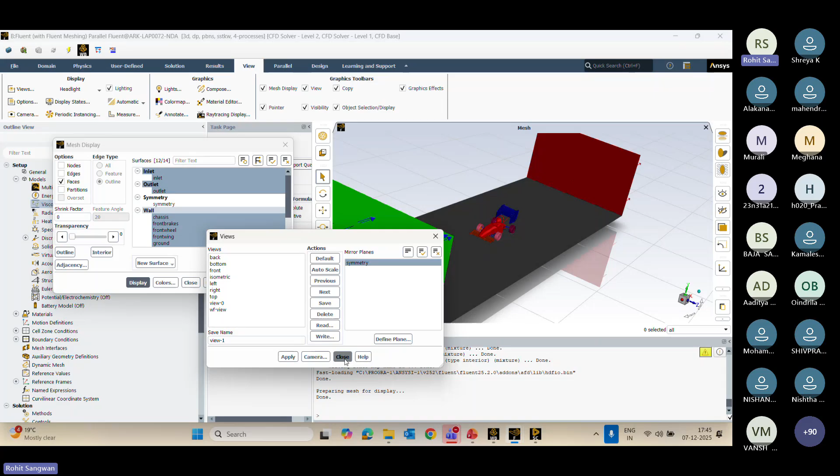So I will hide this symmetry plane. Now apply. Now you can see I have created a half model, but I can visualize my complete CAD model using view symmetry, under the view option, view mirror plane - it will create the model, but it will not add any computational time. That we generally do after running the simulation, to check the post-processing part.

Then we can go with the materials. We have air by default in the fluid materials. If you want to add some material, we have the option - just like engineering data in structures, in CFD we have the fluent database. So we can add any material here, and with each version the materials are increasing.

And if some material is not there, you can simply type the name or chemical formula here. If you know it, enter it, if not, you can leave the space and give the properties. Since we are looking only for flow, if I enable the energy equation, the energy parameter will turn on - let me show you the equation.

Then specific heat and thermal conductivity - depending on what kind of models you are solving, you first have to enable those models, then the properties will come automatically. As of now we don't require this, so we can turn off this equation, and these properties will change automatically. If you want different density, like compressible flow using ideal gas condition, you can use that too, but for this we don't require it, so it's our normal part.

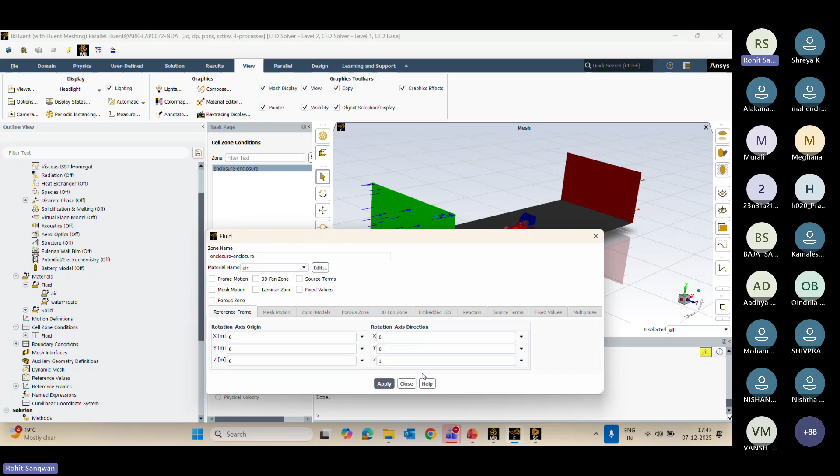Then we'll go with our boundary conditions, same way.

So here we'll go with the zone type. At the inlet we are giving the velocity. Since the vehicle is not moving, instead of moving the vehicle we are moving the air, so we are given the velocity 20 meters per second. The turbulent intensity here is around 0.5%, and we are keeping viscosity ratio 2. Same way, if we enable thermal or other models, those models will be enabled, then we can provide those parameters.

Suppose this is my normal air - if I'm giving some coolant air or hot air, if we're looking with respect to temperature, then I can provide thermal input. For that I have to again enable the models. So these things are very important when we are using those parts.

Same way at the outlet we are keeping the atmospheric condition. You can check in the operating condition, 101325 Pascal, which is equal to 1 atm atmospheric condition. You can change that parameter. We are keeping gauge pressure as 0 because gauge pressure measures above atmospheric pressure.

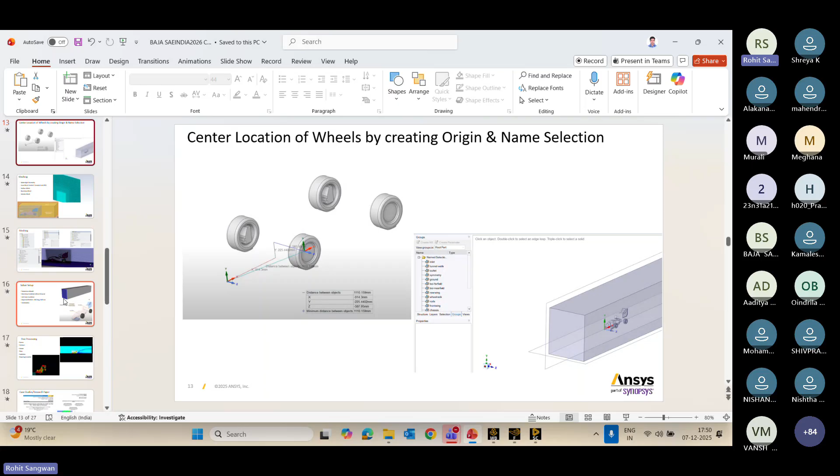So angular velocity - we generally find it by dividing the initial inlet speed we have given by the wheel radius. That way we can find out the angular velocity in radians per second.

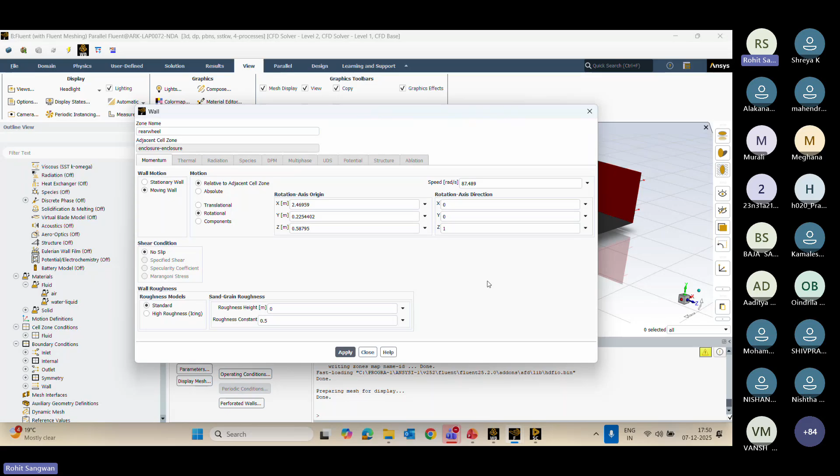Okay, then we have applied those boundary conditions. Then we'll go with the methods - for discretization we are going with second order, which is like a kind of Taylor series form. The higher order we go, the more accuracy we'll get. There are a lot of schemes also available.

For pressure velocity coupling, Simple means the pressure equation will be solved separately and the velocity scheme will be solved separately; when coupling, both will be solved together. For this kind of simulation we use the coupled scheme and second order scheme. Then controls - these are the relaxation factors to control our simulation, and we're keeping them by default.

Then comes a major important part in the external flow simulation - we have to find out the lift and drag forces. You have to go to report definition, right click, new, force report, drag and lift. Like this you have to create it.

Then you can name them and you can select where you want to know the forces. So as of now, I want to know the drag forces at this location and the direction. So you can see here, my air is coming from this direction.

So the drag will be in positive x direction, so I have kept 1. If my air is coming from this direction, then drag will be towards that air direction, so I will put -1. Same way for the lift, lift will be in positive y direction. So by default they will come like this. But if you have a different axis of rotation, you have to find out at which direction the forces will act.

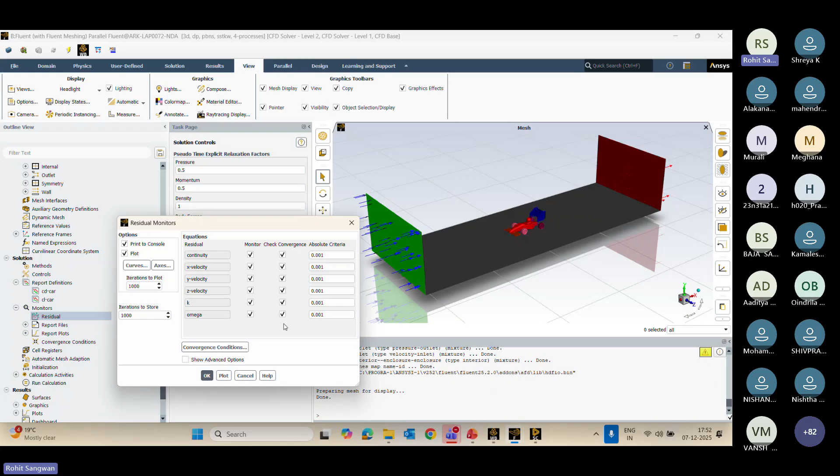Then we'll monitor residual. So what kind of equation we are solving, what are the convergence criteria we can enable. Sometimes we get convergence very fast within 5 to 10 iterations, so we can increase the convergence criteria. Mostly in battery simulation cases we observe this. So minimum we should have 1e-3, for energy e-6. Rest we can vary with respect to our requirement.

Okay, then once we create this part, this plot will be created. Then we'll initialize our solution. Initialization means initial value we are giving. So in boundary condition, what we have done, we have given the value at the inlet, at the outlet, at the walls, but at the grid, we have not given any value inside this enclosure domain. So we are giving some initialization value, initial value to start our calculation, that we do in the initialization.

So for initialization we have hybrid initialization and standard. Standard means when I want to compute from a particular location, and hybrid will take the average value. So here we have done the hybrid initialization and then the FMG. So when we have this kind of complex flow, we simply go with the FMG initialization also. This multi-grid initialization will help to get more accurate initialization at the starting level so that we can reduce our computational time.

Then we'll run it. If you want to create some animation, we can create that also. In this case we have not created it because it was taking more time. Then run calculation, now we can give the number of iterations and calculate. For this case, I think this part is showing, so I'll show you this. After running, I have...

Plot. Okay, as of now we have changed. I will open another case which we have done. Let me close this and open the other one.

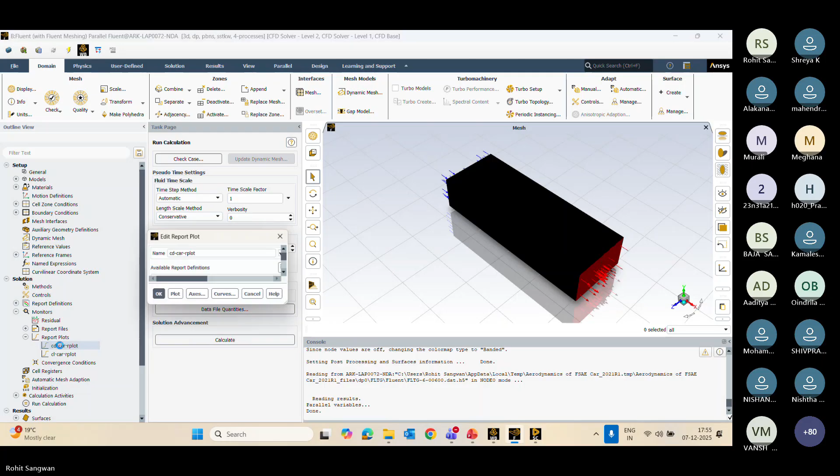Okay, now I will check in this. So the monitors, report plots. This is coefficient of lift. Now you can find this is my coefficient of lift graph, and you can take out the average. So once you create the report definition, you'll get the graph like this.

Even if you want to calculate, we can calculate also. Okay, so this is our coefficient of drag, you can see the CD. CD stands for coefficient of drag, same way coefficient of lift.

So whenever you are looking for the results, you can recheck them also. Generally students face issues, 'sir, I have run the simulation, I stopped, but I missed the plot part, how can I take that.' So they don't have to run it again. They can simply see the report plots and there check the parameter values. Also, if you want to see in the console window, there's an option to check.

Like if you go in the report definition, coefficient of drag, there's an option compute, so it will compute the total coefficient of drag. But this is not the right way, so we go with reports, fluxes, sorry, forces.

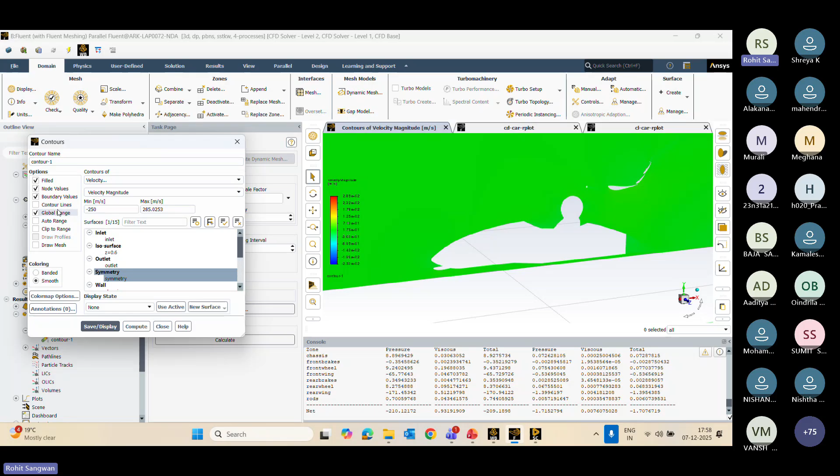So here we'll go with the auto range at this particular plane. Now you can see where we have the maximum pressure, we have the low velocity, and where we have the low pressure, we have the maximum velocity. So this way you can check this parameter also and the fundamentals.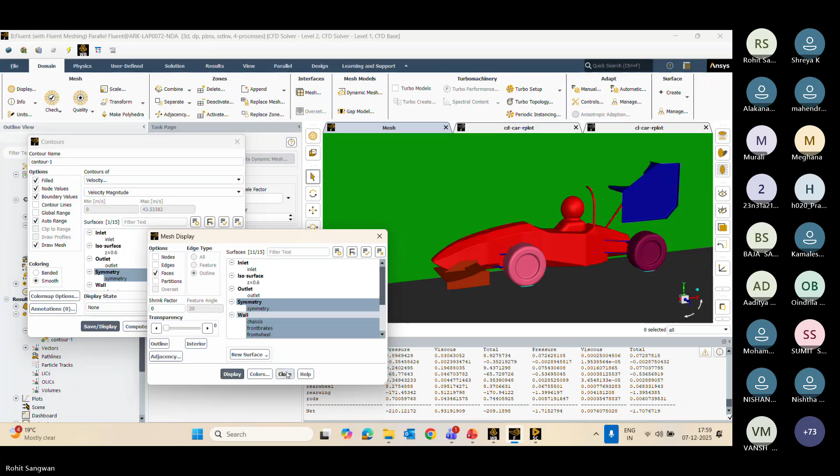Now if you want to see the car also, what you can do is simply display, close, save and display. Now with respect to car, it will display.

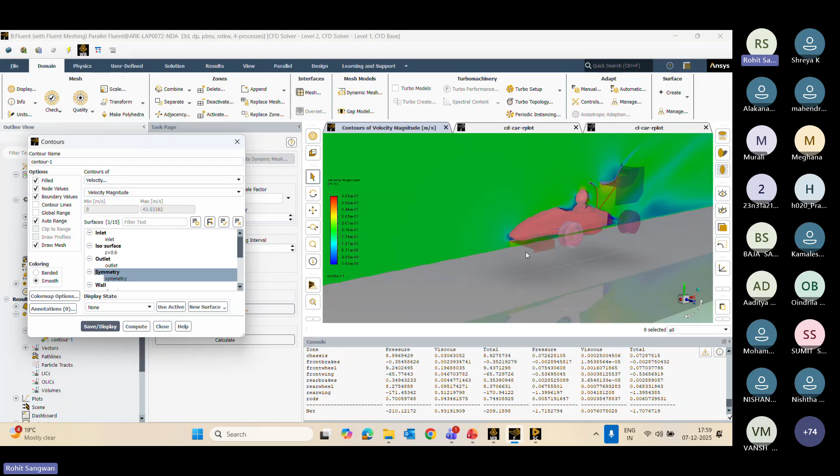Velocity. So generally we have given color to this part, so it is not that much visible. But if you see here, you can display, draw mesh. Here also we have an option, I can make it transparent also, 80 percent display. Like this, now you can get better visualization of how it actually is.

Same way you can check for the pressure also. So this way, we can create some ISO surface also, particular values where I want to know the parameters. So this kind of contour plots are very important, and you can visualize how the flow is going on.

Now, if you see, I have created one ISO surface. So how can you create the ISO surface? Z is equal to, new ISO surface. Here you can select the location wherever you want to create, or if you want to create some plane also, new plane.

So directly it will show in the axis. Now you can change the method, and wherever you want to create, you can create, and you can move with the cursor also. Like this, we can create a plane at any location, and measure the value at a particular location. So when we have some internal flow, we generally check the pressure value at different locations. You can cut the plane, and check that part also.

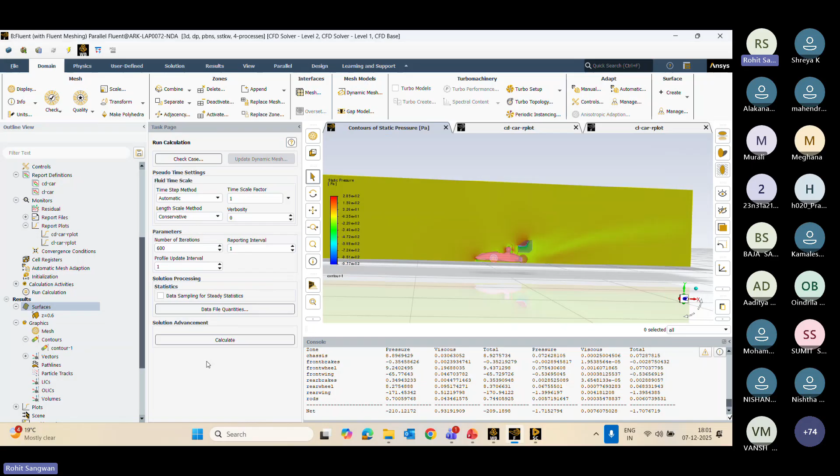Now here I have created the ZX plane with the surface of mesh, Z coordinate, and given the value of 0.6, ISO 0.6. Now I will check the vector at this particular location, and increase the scale value to 3. Draw mesh. So like this, you can see the vector. If you hide this draw mesh vector also, you will get better visualization.

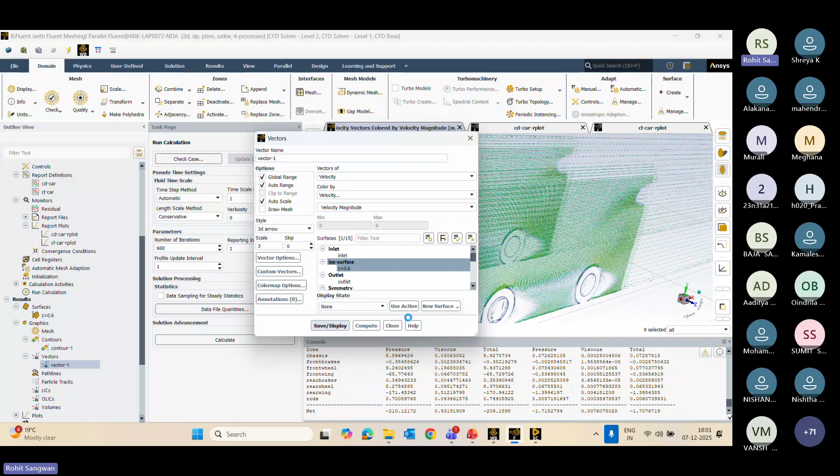We have an option also, we can visualize the part, we can move the surface, and we can create the path line also. Path line will take more time to display, so I have kept it in the slide.

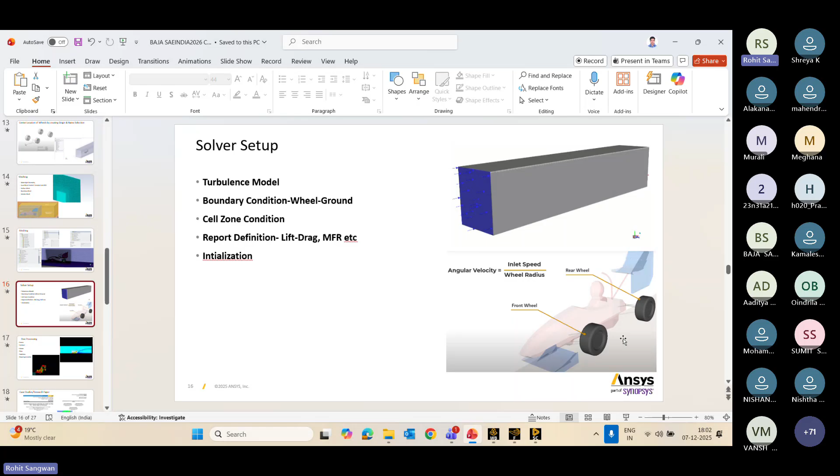So this kind of results you can visualize. Generally, in the setup, we have selected the turbulence model, applied the boundary condition. The wheel condition was very important, where we have given the angular velocity as well as the rotational direction also. Then the zone condition, based on the material report definition, we have selected the lift and drag, and mass flow rate also. If you want to measure, we can create the mass flow rate, and velocity also we can measure.

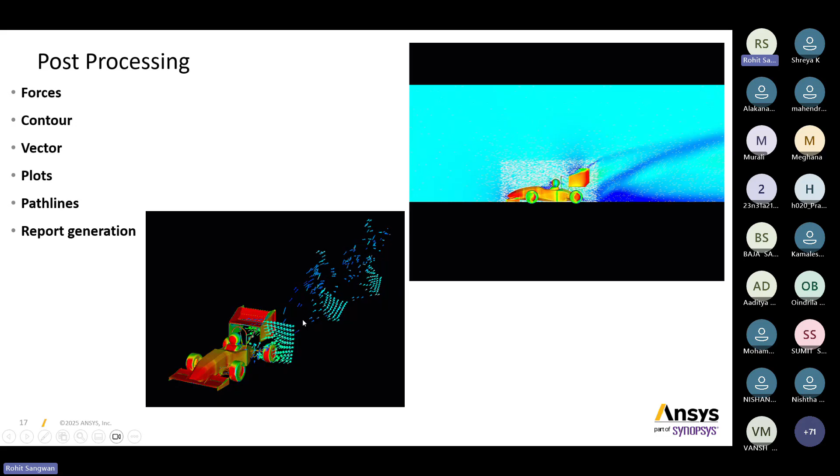Then in post processing, we check for the forces, like we have observed the lift and drag forces. Contour we can create for the velocity, pressure. Vector also we can create. Then path line, like this, how it will move, and we can visualize the flow also. Then there is an option in report generation also, how we can generate the report.

So in the tool, we have the option, we can simply go to the last part, simulation report, and report outline you can go, and you can generate the report. It will generate the report in PDF format or PowerPoint format if you want to create.

Before that, you have to create the contours in proper way, set view, then only it will be beneficial. Just like Mayank sir showcased the parametric simulation, if you want to do parametric simulation with respect to your design, like varying the velocity.

What you can do is go with the boundary condition. Now, if you see in this workbench, I don't have any parametric setup at this case. So you want to create it there in CFD also. Go with the inlet, add it.

Now I want to vary my speed, because in a vehicle generally what we are doing is increasing our velocity. So I want to see at which velocity we are getting the maximum, how the drag value is changing.

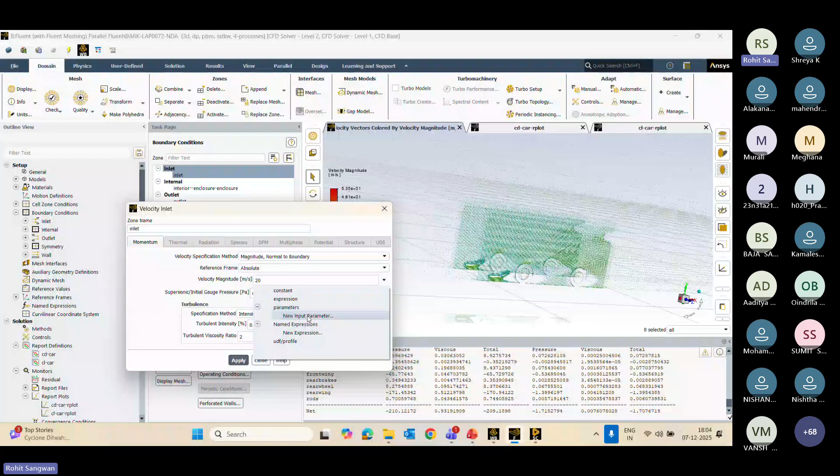So here you can go with the new option, new input parameter. 20 meter, so you can name it as parameter velocity inlet.

Now apply, close. Now since we have given the input, we have to create the output also. So for output, there is an option, report definition, and you can see there is an option, create output parameter. So you can create output parameter, and okay, it will create the output parameter.

Further, if you want to create more output, you can select things like surface report, if you want to see the mass flow rate, how the mass flow rate is changing at the outlet if I'm increasing my speed. Then select the outlet condition here and get output parameter.

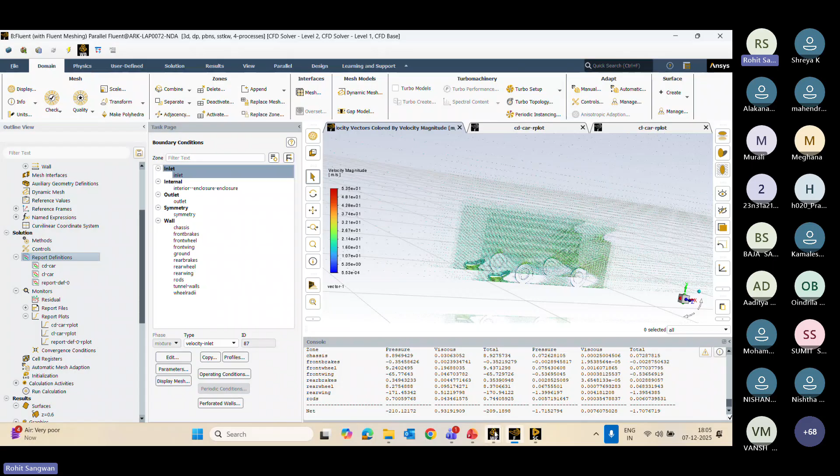So with respect to change in this part, any parameter you want to optimize, you can optimize, and then you can see in the workbench this parameter will come. So you can see here, Parameter Set.

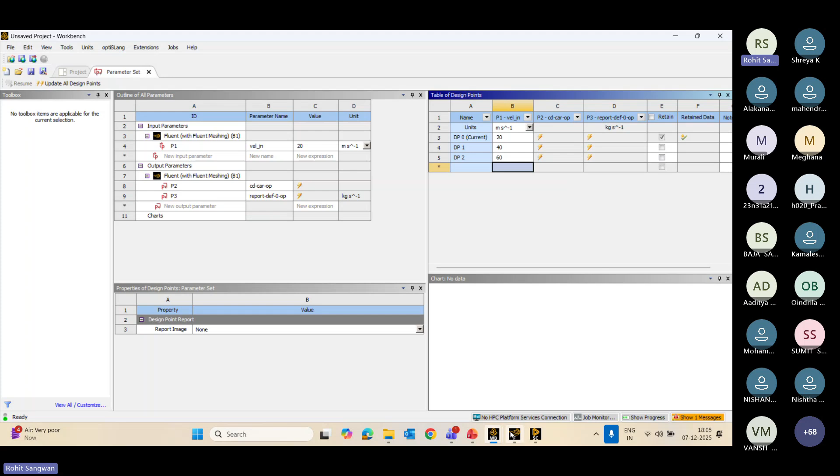Now here I can change my velocity to 40, 60. Then I can run it and visualize how the coefficient of drag values are increasing, and how much it is increasing, so which speed is optimum for us to have the drag value. This way you can check that part, and later on you can optimize it.

So you can go to Google also, you can find out this research paper, and you can see how post processing they have done, and for the vehicles, how they were able to optimize the wake regions and other regions. So this is from previous papers.

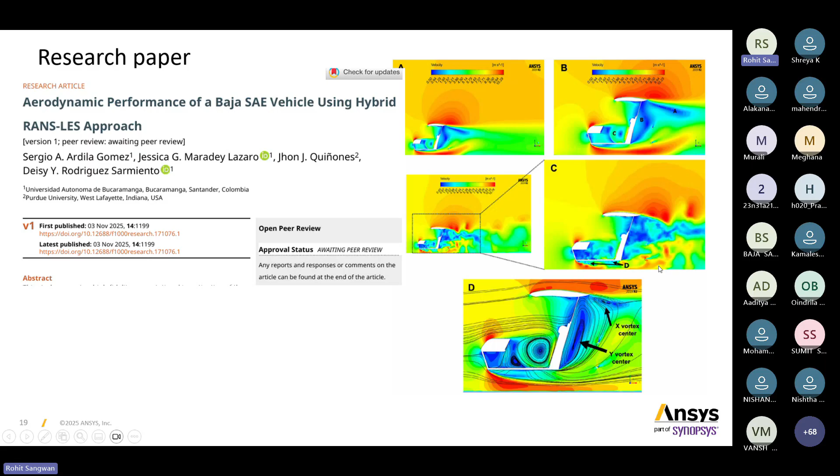If we go with the respective paper, one researcher did it for large eddy simulation, that's why I mentioned LES. So he had a lot of time. Even when you're in third year, along with practicing, if you want to publish some paper, you can go with some publication of your design also. You can do the CFD simulation and it will help give more add-on value.

Now comes the last part, from where you can learn this program. For this we have the Ansys Innovation Course, where students can take the fundamental concept learning, what is CFD, how we apply the physics, all those parts. Once you learn the parts, if your college or institute already has the tools, and professors have the Ansys Learning Hub portal, where we have solved cases, examples, and advanced problems.

So sometimes you get a lot of queries, for that we have the Ansys Learning Forum, and if you want to get certified in these courses, you can get the certification also. As of now in AIC courses, we have courses for all physics, fluid, structure, electronics.

Even if you want to learn some Python related to CFD or mechanical, you can learn that also, and apply it to your code. Related to metal also, there is a lot of information. More than 374 plus courses are there, which you can learn physics and engineering courses from.

Then we have ALH, where we have learning course material for research scholars and faculties. This is not for students, but if the college has it, you can take help from your faculties also. Then there is a forum where you can put your question and discuss, you can see how people have already worked on that problem statement and given the solution. Then you can get the certification.

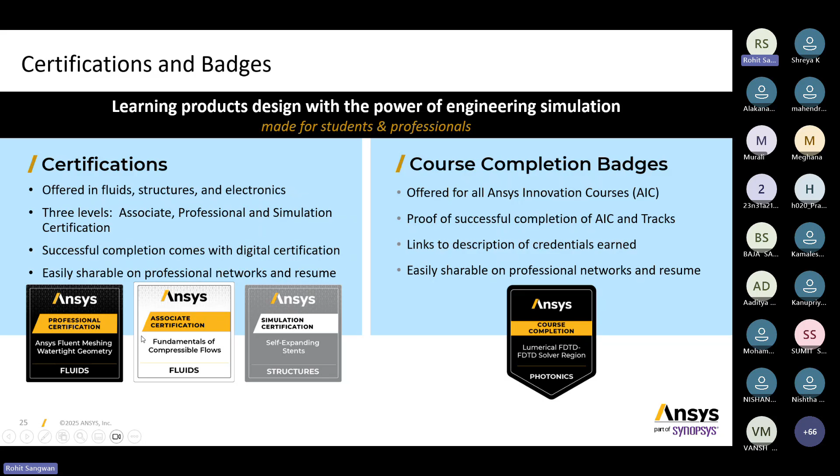Just like Google Play Store, we have a purchase store also. In Ansys, you can go to a course, and if you have completed the course, you can get a certificate like this. So these are a few examples, and these are the badges. This is the complete course certification. So these are paid, but the learning is free of cost.

Nowadays people are using ChatGPT. Same way, Ansys has a virtual assistant. For students we have the virtual assistant, and for industries we have Ansys GPT. So you can ask a question directly there if you get stuck somewhere, and it will give you the related material, content, which model is there, where. You can search that way too.

I'll show you one course just like we have done. You can simply go to Google and type Ansys innovation courses. The first link you will see Ansys will come, and directly you can search free courses there. We have physics also, fluid structure, electronics, so you can filter out the physics if you're looking for any particular part. And if you want to search, I can simply type SAE, done.

You can download the student software just for basic learning in your personal system, not in the college, in your personal laptop, to learn the physics in your free time. So there are a lot of courses, theory courses also from NPTEL, and simulation-oriented courses too. You can see chassis analysis, BAJA SAE chassis analysis related to the FEA part.

If you want to see aerodynamics, you can simply type aerodynamic in front, and it will show results related to the CFD part. You can see this course here, go to this course, and enroll. Learning is free of cost. You don't have to worry, you can learn in this course how to create the model, front impact, side impact, all those kinds of simulation. I'm just pasting this link for your reference.

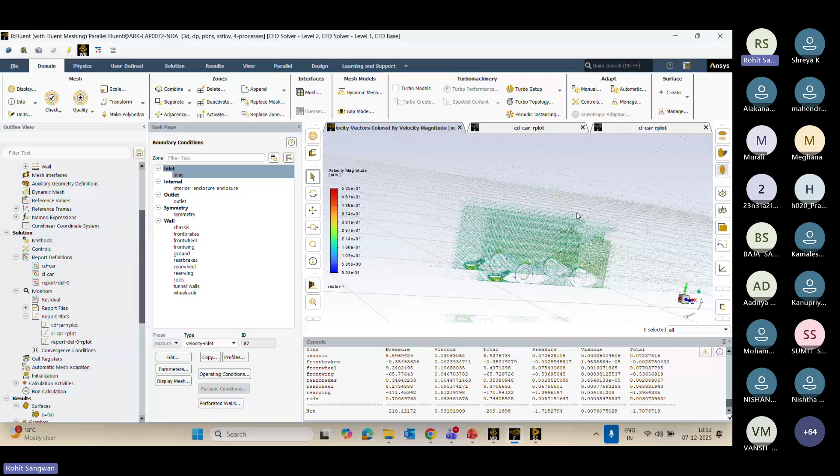These are the videos already available on YouTube. In my case, in the US, it is not enabled, so you can check at your end. I've shared the link with you, just check at your end using these links. Any other question? If you have any other question, please let me know.

Yes, we can get it from SpaceClaim.